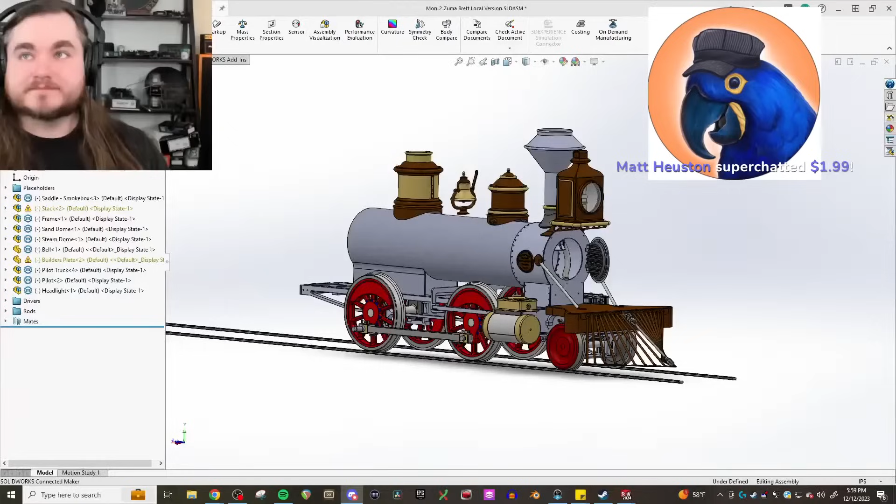Also Mark, you should know that people are asking about SolidWorks in chat. I had SolidWorks and Corey Gibson in my Railroader stream chat yesterday. I am glad, I'm glad.

Anyway, you can see here is our little Zuma lad. And it's missing a bit that it used to have, which was the phoned-in part of the cab. Last time, if you want, we could put it there, but I don't. You have the profile of the roof, and that's all you need. Like, that's the only thing that's really important, because that was actually done.

Oh good, oh good, look who's here now everybody, SolidWorks. Hey, I'm sorry I couldn't get around to working for you. I was dealing with more important things, like helping people who matter. I don't know, your whole website was down, you piece of shit. Fuck you.

Thank you SolidWorks. I don't think that's actually SolidWorks. I don't think it's actually SolidWorks either. SolidWorks, do you talk to your mother with that mouth?

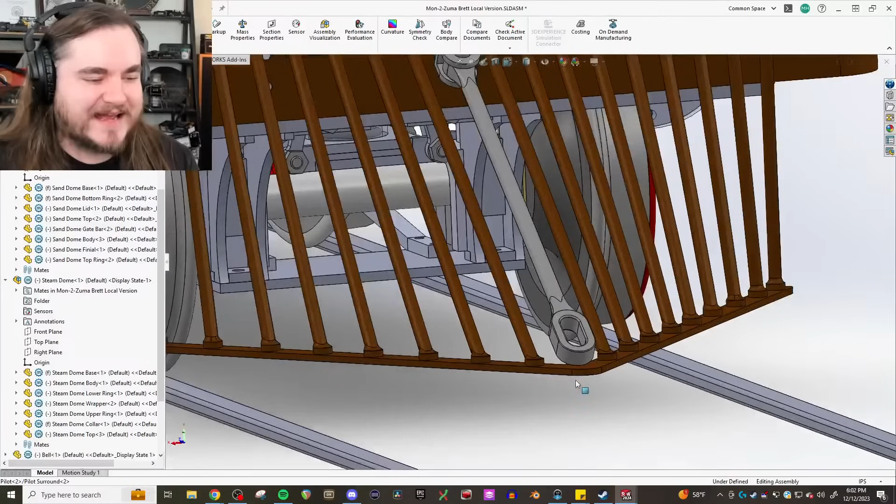The thing that happens when you aren't asking anymore, you're telling it - yes, pretty much, the blue tip wrench, the gas hatchet, the thing with many names. We now have a pilot, whatever it is - a link? Do you call it a link still? It's not a coupler, check what I called the part. Oh god, I mean that's a drawbar, but the upper bit - I thought that's what you were talking about. Oh, the upper bit? I don't know what you call that. Pilot draw head, pilot drawbar thingy. There you go, yeah, there you go - the pilot drawbar thingy.

Yes, very good - so those are all added in now.

Corey Gibson asks: which bathroom appliance would be the worst life preserver? The sink. Limes. Correct, you're not wrong, but limes - you're not wrong, but you are bad.

Okay, let's see - so we talked about Ding Dong, we talked that the pilot truck is now not just a floating axle and wheel set. It's actually a properly designed, according to the Baldwin spec, for a Bissell post.

Yes, lead truck - so I cheated a little on that. The pilot truck is Shawano's basically, which for those that don't know is Rio Grande number 3. Which one was Shawano? It was a 2-6-0 built a couple weeks after Montezuma. Tabawachi was number 2 - I'm sure Mainline's in chat. Mainline, tell us what number Shawano is. I think Shawano was 3. Yes, of course Mainline's there and says it's 3. Yes, good - okay, so the pilot truck is Shawano's, excepting the Bissell post.

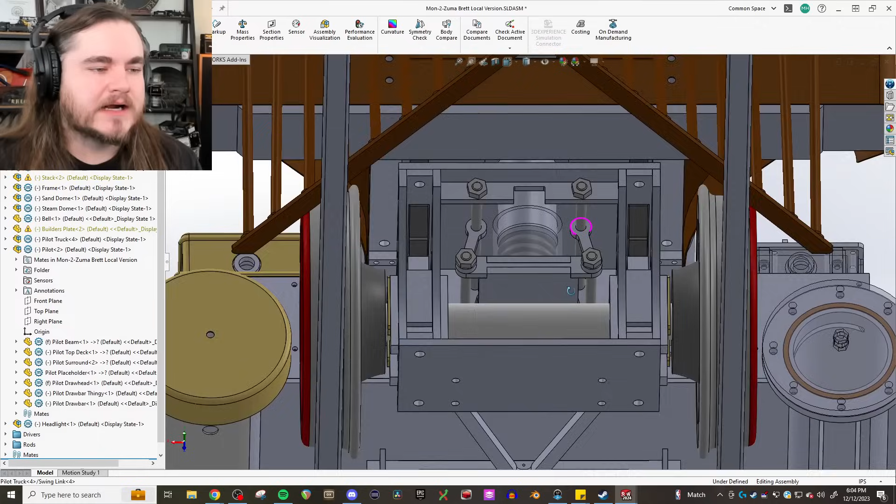On Shawano, it goes up through the pilot deck. I managed to design my own Bissell post that I think will serve functionally, but also have enough travel, and it does not protrude through the pilot deck. How do we oil it? Through a hole in the top. Gotcha, there will be a hole in the pilot deck - there will be a hole in the top, and that's one of those that it's like, oh, we need to oil this, grab a drill, zzz, there, we can oil it now. Yes, precisely - or an elaborate series of hoses, a la Dr. Broadtop, your preference.

Yeah, but we got the swing links, which actually I haven't seen this style on a one-axle lead truck before. This is kind of more akin to a 4-wheeled lead truck, almost, with the way the swing links are. That's pretty cool though - yeah, it's kind of strange.

It should center itself, like, let's set up nice. It's a little strange because in order for the Bissell post to work in conjunction with the swing links, it swings, and then the swing links also slide back and forth, so that it can actually move on an arc and not just laterally. Oh, that's bizarre. Yeah, it's one of those things that I don't know that Baldwin actually designed for that, or if they just kind of put it together and the tolerances made it work. Because really, the amount of swing that this truck is going to see is very, very minimal.

Right, but yeah, if you want, go ahead and rip open the thing in the Montezuma chat - I've got a reference for Shawano's drawings. Oh sure, yeah, show those on stream - that'd be kind of cool.

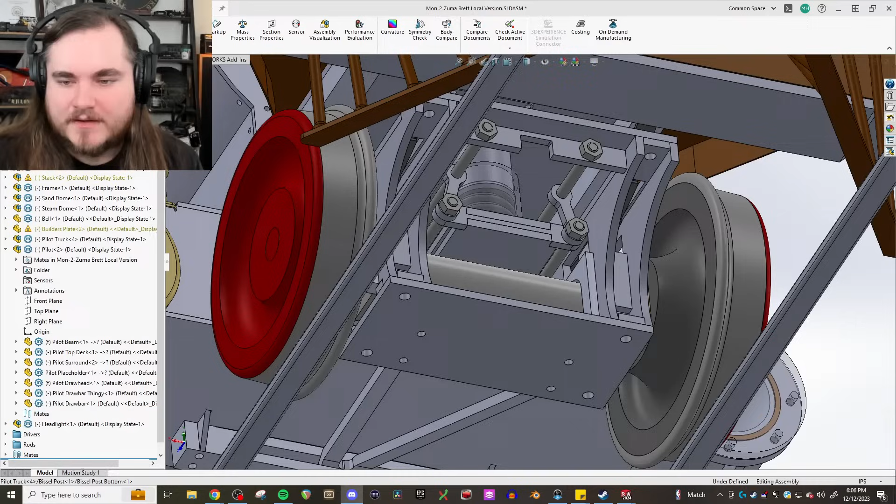Thanks to Daniel Gallery, the man, the myth, the legend. Daniel posted this reference, and I was searching through it, and it's like, oh wow, that's a really good reference. Holy crap, it's Shawano!

Wait a minute, it's something from the 1870s. Wait a second, that says Denver and Rio Grande. 1022, you know that? What page is it on? For me, it was page 2, row 2, items 1 and 2. But I think your rows are a little different.

Denver and Rio Grande, 1871, May 18th. That's probably about right. They're right next to each other. That's the erecting card, and the other one's the elevation card, I think. I can never remember which is which. It's a 1026D, so maybe it's this one.

We'll look at the picture next to it in the list. DNRG cylinders, 11 by 16. Oh man, really doing the thing. Oh, but yeah, there you go. There's your elevation with the double pilot.

Big Baldwin, big cows. It's two pilots in one. I assume that's for different designs, but I would assume so too, considering that the heights of the draw heads are different as well.

Yeah, but there's the pilot truck. That's cool that this exists.

This is going to be a great resource, not just for that, but also for looking at things like the dimensions and the flares on a lot of the cosmetic pieces. It helped with the domes. I actually revised the domes from when we last saw them, I think, to be Baldwin compliant. And the cab, it shows the cab in detail.

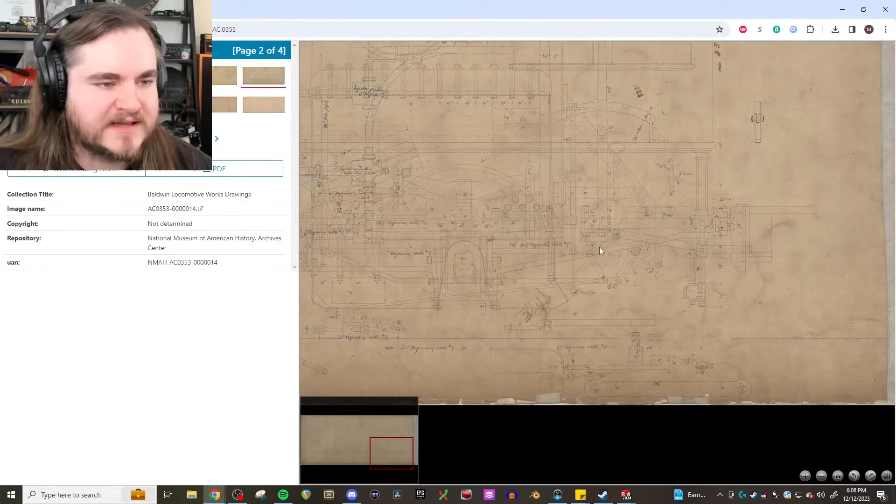That's something that we have zero pictures of, yeah. So there's a lot of stuff in here that'll be helpful. Lots of little fiddly shit too, like ash pan linkage and presumably grate shakers.

It's got a damper. You can see the damper in the builder's photos of Zuma, but now we actually have a drawing of like, oh, that's how it works. There it is, look. Oh yeah, the lever, and then yeah.

It does. It's for the front of the ash pan, and considering our engine will probably burn oil most of the time, a damper will be useful. Probably on the back though. It has both, it has a front and a back.

Yeah, there's this long articulated linkage to this guy for the front damper right there. And then the rear damper is this other pull handle right there. That's just a fun thing, like the development of American motive power there. It's like we didn't continue with that.

Oh god, of course she has crown bars. Duh. Yep. I don't know what we want to do about that. If we want to do, I mean, we have to do crown bars, don't we? Do we? Because we have to get in the steam dome.

Oh shit, you can't do radial bolts if the steam dome - you can't bolt through the steam dome. That is true. That's a mild problem. No, it's not a problem. I mean, a lot of engines have crown bars. It's just something that neither of us have worked with before.

We have dimensions for a throttle valve, presumably. That's hilarious, for some very large pistons, but I mean, I'm sure you could play football with that throttle valve. I mean, look how cute and tiny it is. 11 by 16s, they're only 2 inches bigger in diameter than the little passenger dude.

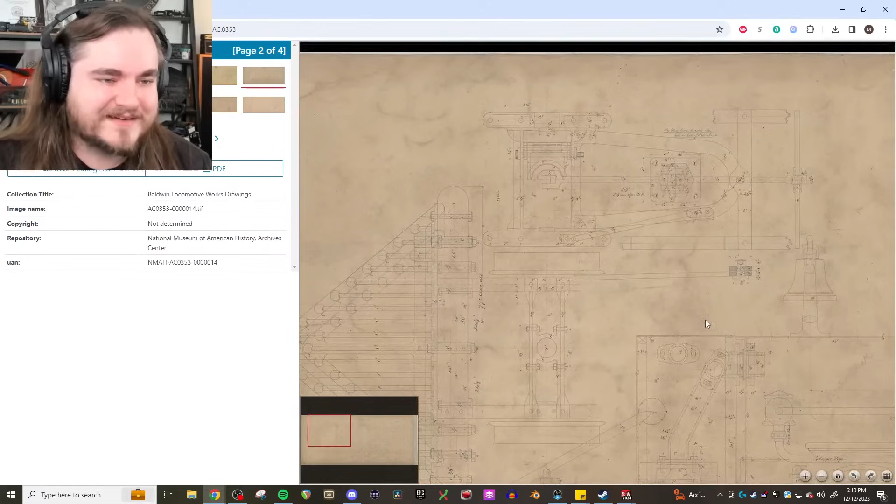How does one man have so many resources for these things? Somewhere Daniel's cackling. The Smithsonian's resource. Well, it's the Smithsonian's resource, Daniel just knew where to find it. How does Daniel know all these things? I know. Anyway, it's incredible.

Oh god, it did have the single branch pipe malarkey. Yeah, the straight - yeah, we're not that, we're like not doing that. Fuck that. Do we know how big - I guess there's presumably a dimension on that if you download the PDF.

Have you sized your branch pipes relative to this? Obviously these are going to be bigger, but no, we found this resource after I designed the saddle and everything. I'd be interested to do a back check on it.

Does only half of it have flues? No, they only drew them on half through to the center line and then mirror the pattern. It's almost like how the Zuma is drawn in SolidWorks right now - you do full build on one side and half disassembled on the other to show things that are behind other things. Efficiency.

That's super cool. What a good, brilliant resource. Freaking resource, no kidding. Yup.

Oh, but Brett, it shows the non-peaked version too. Or the non-hoopty. See, you've got the hoopty, but then it shows the peaked version? There's the peak underlaid underneath it. Perfect. I was just thinking for the rear windows and the door geometry it'd be the same, but yeah, it's got the correct roof on it. That's gonna be great.

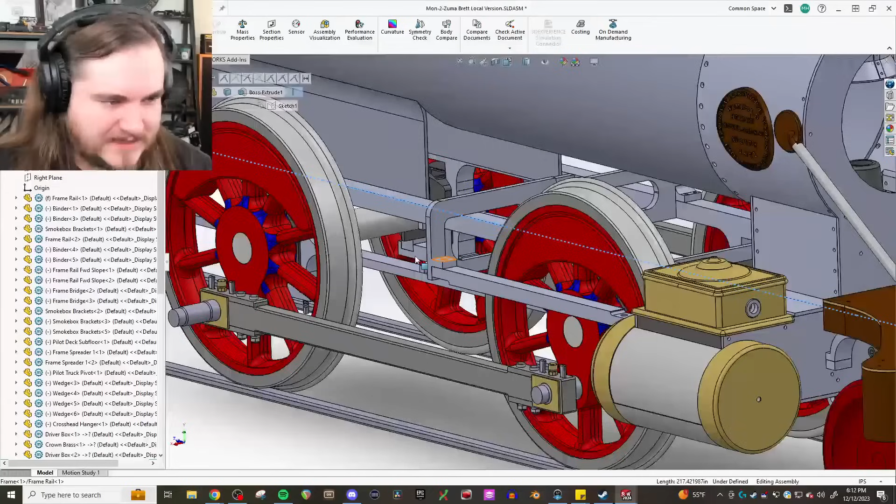And then Brett keeps talking about the frame actually being a thing, so let's pull open the frame just by itself. I just like staring at the frame, because my frame was very much phoned in.

Babies first, I'm gonna try and trace this drawing. And Brett came through and was like, 'This is how you make an engineering thing.' And then here it is. Where is the assembly? It should just be called frame.

There it is, yep. Because I was ridiculed for naming the headlight assembly.

Let's see, oh I missed a couple top chats here. Railman 1225: one would probably call the thingy the pivot. Probably, I don't know, probably. And Corey Gibson: why was the ghost so tired? He worked the graveyard shift.

I feel that. Yeah, so here's the actual frame of actual frameness, with your driver boxes. Yeah, look, I contributed parts to this - boxes, hub liners, crown brasses - but we have frame spreaders. We didn't have any frame spreaders before. We've got the semblance of what will presumably be - we're gonna put a spring buffer in this thing, right?

Please, I mean, we can in the tender. Yeah, in the tender, not in the engine, but yeah. In the tender I'd say let's put a spring buffer. Oh, you're gonna feel every hit, every single hit. We're gonna feel every hit, and it's gonna throw the engine off the track.

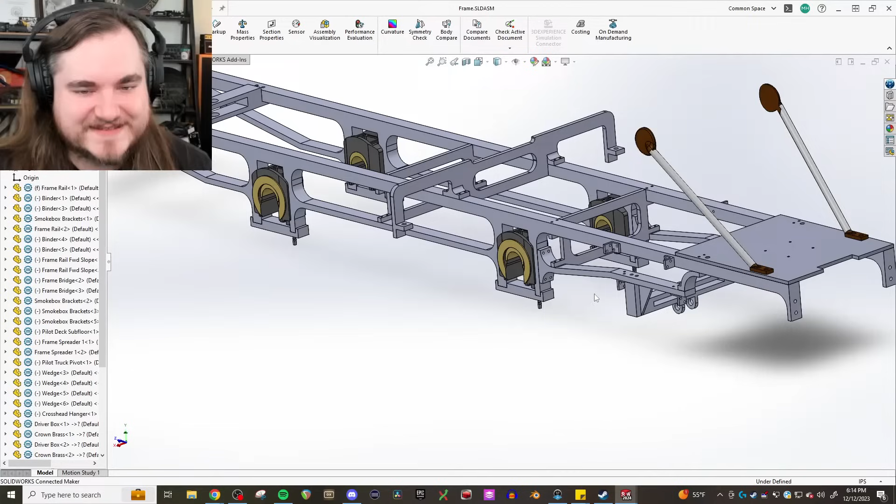Pretty much. Well, the tender was ahead of you, but yeah. So anyway - oh I see, you'd have to set something on the independent, and I don't think it had a driver brake cut out. But yeah, we actually have swept things for strength. We have actual spreaders going across with locations.

What's that hole for? Is that for the drawbar pin? That big hole back there? Yes, the big one's for a drawbar pin. Oh, that drawbar is gonna stick in there pretty far, isn't it? Huh, yeah, interesting. That's kind of a placeholder - we can do with it as we will.

Okay, cool, we have binders. Oh, he threaded the lollipops. Oh, you love to see that. I threaded the lollipops, but they're the same piece as the wedge, so I cheated a little bit on that. You put them on the wrong side?

Are they supposed to be wedges that go on the trailing side? They have been on every single engine I've seen. I suppose you could probably do it that way, but then you're adjusting away from your piston - well, your crosshead, right? As everything wears, you're trying to pull it away rather than come closer.

So you did - I will dock 10 points. Yeah, that's fair, that's fair. You put the lollipops on the wrong side, but that's fine. Oh no, how dare you? We're gonna construct it tomorrow, so. Oh yes.

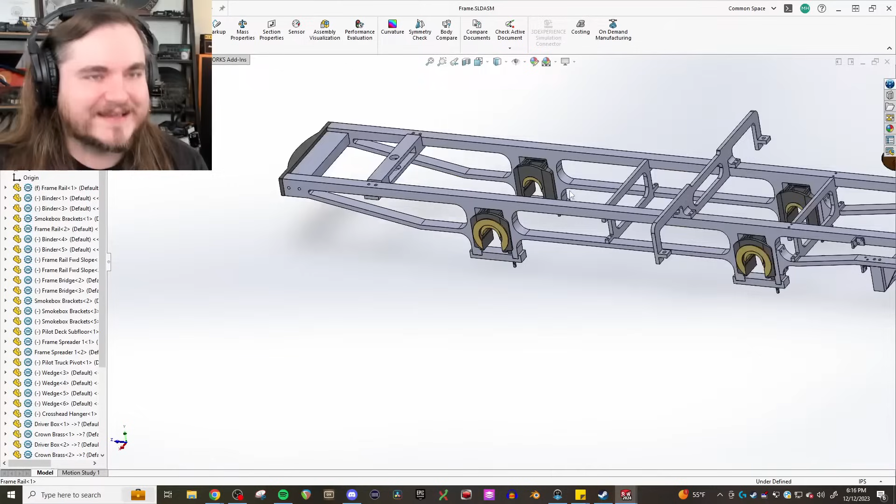Please, can we begin? I wish. Can't wait. All right, I'll call him up. Yeah, call your friend. Mr. Moreland knows people that know things, and there have been discussions about things involving official matters, and that's about as much as we can say right now. But anyway, talks have begun. Unfortunately, fortunately, it's fine. More talks will need to happen.

Anyway, we also have the actual final refined interaction with the saddle itself, which is exciting. And then, of course, the connection to the lead truck. I love these big, curvy, beefy boys up here. Those are cool. I hope they're beefy enough.

So what's the final thickness of the frame? It should be 3 inch, measured laterally across the rails. For the top bits it's some weird dimension, and the bottom I think is 1.5 tall. I meant thickness, 'cause that's what matters when you laser the plate. Yeah, we've been at 3 inch for a minute. That didn't change.

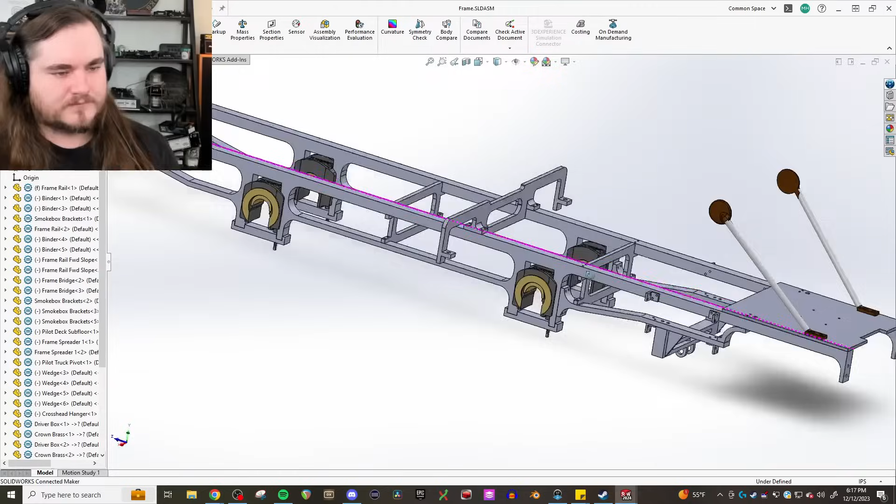How thick are the crossmembers going to be? That's a big plate. I wonder how big the bed is. Crossmembers I think are an inch thick. They look like an inch, yeah. If I had to guess - we've got a measurement tool, and it's telling me distance, 1 inch, yep.

I tried to do everything on the frame out of reasonably available plate. Same with the pilot truck, which is actually kind of cool because it's all slot and tab 3/4 plate. So we could get all the pieces burned out of a 3/4 inch sheet of steel and weld the thing together in an afternoon. That's the whole point of the death ray - you can burn it out and it's a super clean cut. You don't have to machine it quite as much as if you had a plasma cutter or a water jet. It gets a cleaner cut than a water jet - it's pretty much perfect.

So I guess the only thing I was thinking about this last night, when I couldn't get to sleep after programming until 3 in the morning - you'd think I'd fall asleep, but anyway.

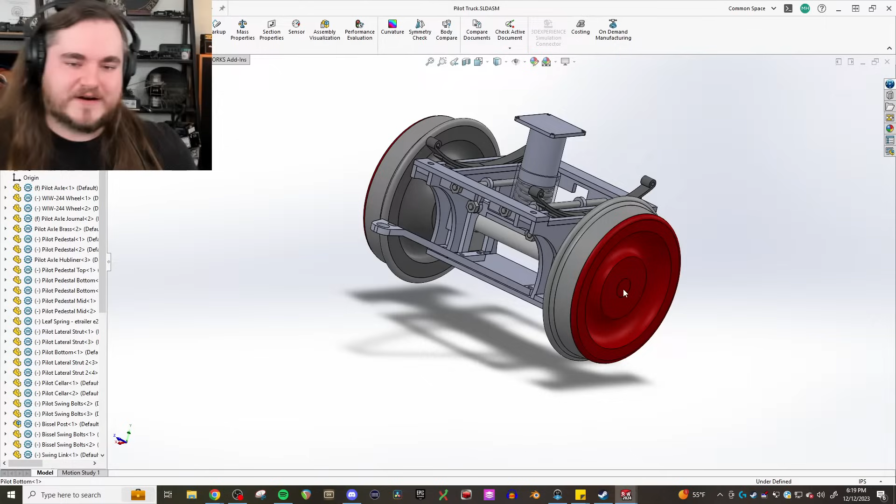If we're gonna do weldment stuff, we're gonna have to be very careful about how we fixture and either normalize or balance the heat so we don't warp a bunch of the complicated shapes. I was thinking in regards to the saddle, because a lot of it is going to be interior fillet welds, and it's going to want to bend all those plates and warp it. So we're going to have to fixture the crap out of the thing and then normalize it, or find a more clever way to weld it so you can weld it on both sides evenly.

I think the only structural welds in the saddle are the cylinders to the saddle castings, and that is probably the most critical dimension on that whole assembly. Everything else has mechanical fixturing - there are a couple of braces and things that are welded, but I think you can put the whole thing together with bolts and rivets. I was imagining we were just going to weld the whole shape up. I don't believe so - if you want to look at it real quick, it should be pretty obvious.

Let's go take a look-see.

Bolts means it's easier to replace worn parts. How often are you replacing the smoke box? I don't know - if you're gonna run it up Cumbres, probably a lot. Well, one got a new smoke box after 60 years in service. I think the goal is going to be to make the smoke box somebody else's problem - I hope to be long dead by the time the smoke box needs to be replaced.

Yeah, I would agree. Okay, I'm seeing... that's kind of the weird thing about this project - there's some stuff that's welded, but I think mostly it's bolted and riveted.

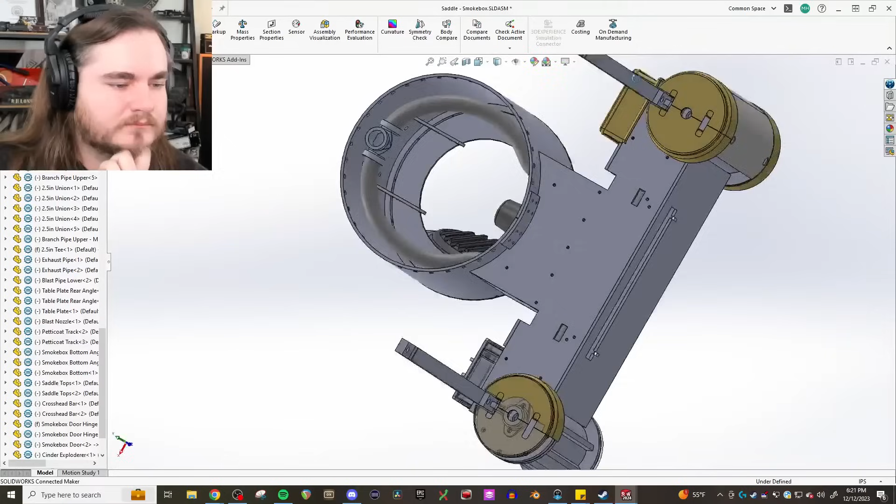Well, when you think about it, if we get this together, it will outlast us. It will be around a lot longer than all of us will be. Hopefully. So we can hope - if we do it right.

So what are the other frame interfaces you're thinking of? I know the bars run through here and then the lower bar runs through there. I guess I can look at the frame and see where the little brackets are.

Okay, so we're bracketing basically four per side, points. We'll probably, once it's bracketed, go with a welder. Probably not a bad idea. Okay, yeah, that's probably fine.

Might want to do a quick back of the napkin on how much force this thing puts out. It's probably not much. I think each cylinder can generate 10,000 pounds roughly.

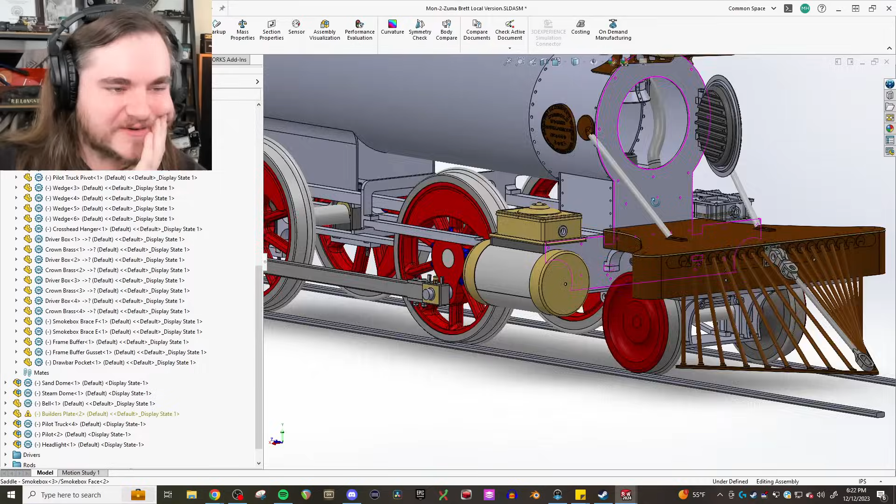It's so cute, it is so cute. I believe that came up last week with Jason. Tiny, so it's less than 10,000 - I want to say it's like 9,700 pounds is the maximum force. Stupid little pistons, stupid cute little choo-choo. He's so little, is that a little choo-choo? Yeah, well you'll love to see it.

Let me catch up on these top chats, and then I guess we'll figure out what's next. I know we were discussing crosshead shoe, most likely. So, shoe and thing and stuff and words.

All right, let's see. Corey Gibson, my man - why do pancakes always win at baseball? They have the best batter.

Yep, who makes all these? Dark Knight 96 - how many Zumas can a Zuma while zooming zestfully? I don't know, many zooms. It's almost been 2 years. Time doesn't exist, so many shenanigans. Year and a half, not 2 years. After a year and a half, then we can get to 2 years.

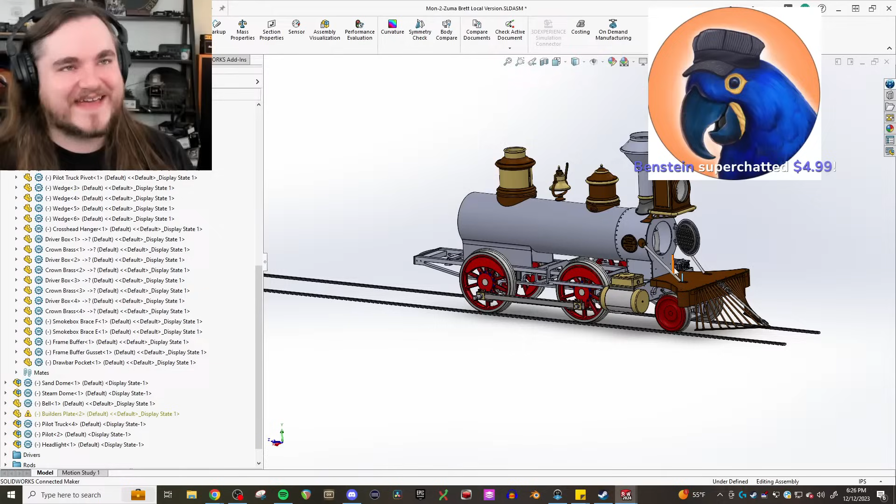We have jokingly thought about insetting magnets in the cab wall where the nameplate goes, so that we can just magnet other nameplates over the top. We have joked about that, I don't know how serious we'll be. I want a plate that says Smitty on it - he was number one. Yes, Smitty was the first locomotive on the ES&D. So anyway.

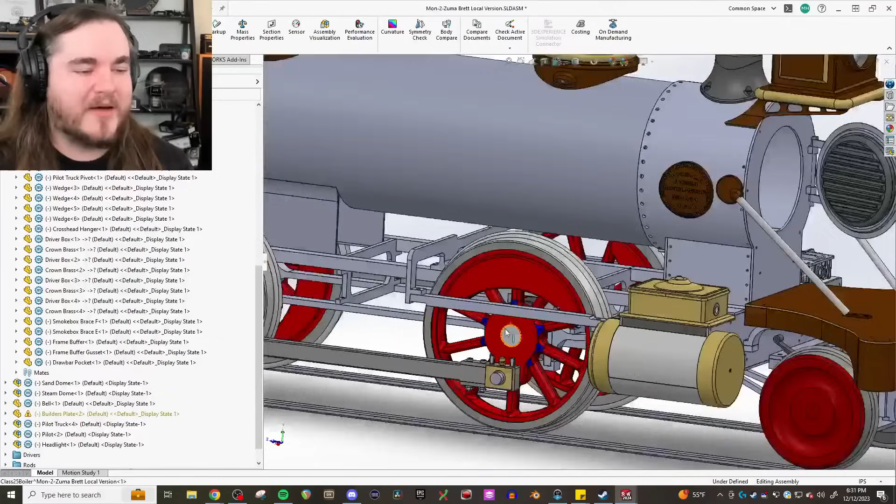Blues Crew asks about magnet paint. What do you mean magnet paint? We will be painting things. But Brett did add the little blue triangles, not where they'll actually be, but where it was convenient to add them in SolidWorks, because she has those little blue triangles on her drivers. But we don't have the red and blue stripes on the domes, because trying to segregate that into areas you could paint in SolidWorks, I will say I really tried, on separate occasions, and it just would not work. That sounds like hell on earth trying to do that. Wrapping around that curvature, SolidWorks just wouldn't do it.

Taladay 56 asks, you're a machinist, what's the best 3D model software so far? What do you mean by best 3D model? I think they mean best 3D modeling software. Oh, 3D modeling, SolidWorks, of course. Next question.

SolidWorks is the one that I learned. I don't know the other ones, so that one.

Blue Screw - damn it, autocorrect. Magnetic paint, I don't know how that works. The funny thing about magnetic paint is you don't need it when the thing you're painting is made of iron.

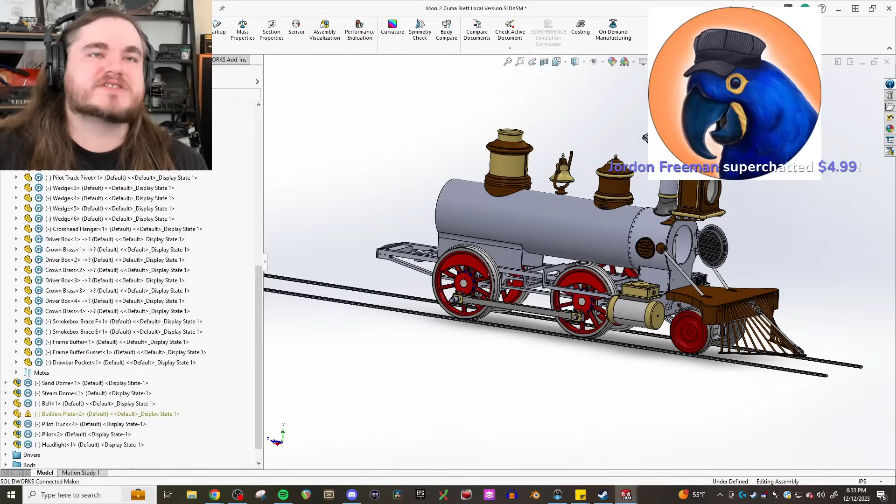Darknut96 asks, will the Zuma slash DRG Class 25 appear in Century of Steam? We do not answer Century of Steam questions here. I appreciate the tip, is that 2 pounds or 2 euros? I can never remember the symbol. I appreciate your contribution, but we don't answer COS questions here.

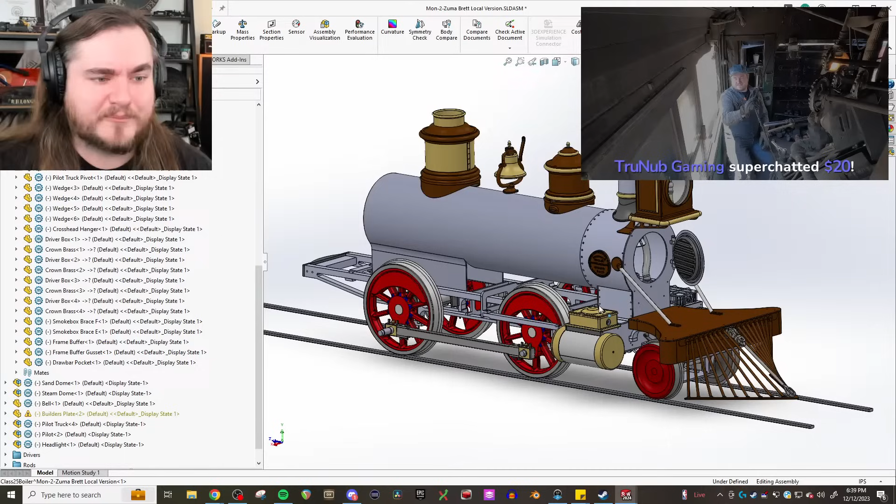Blondie Hacks is doing a build, is it 3 1/4 or 3 3/4 inch gauge? I don't know what gauge it is, but she's building a cute little Pennsylvania 0-4-0, and that's been an amazing build to watch her craftsmanship. She called me out in one of her series' comments, favorite lately. So good. She's focusing on the machining and forming and fabrication sides of things, and I would be more likely to talk about the design, locomotive history, and engineering principles on my end, because I'm nowhere near as good of a machinist or fabricator as Blondie Hacks is.

But I know a little bit more about locomotives, I'd imagine. So that was always a dream. And then we sat there staring at this cute little doot, the Denver and Rio Grande #1 Montezuma. It's a class 25 locomotive. It's not a Montezuma—someone commented that on my YouTube yesterday, and I face-desked about as hard as physically possible. It is the Montezuma; there was only one. It was #1. There were 4 locomotives of the class that worked on the railroad, and apparently, based on pictures we found elsewhere, there were a couple other Baldwin 8.5 C3s, which was the Baldwin classification for these, that worked on other railroads that were 3-foot gauge.

Super neat. But we looked at it, and it's no more complex than that little 7.5-inch gauge engine. It's not really that big, it hardly weighs anything. In fact, in many ways it's less complex than an engine you could build in 7.5-inch gauge, because it has fewer drivers, simpler things. It's bare bones, it's early. If you did the Zumi boy in 7.5-inch gauge, it would be smaller and simpler, easier in terms of weight and whatever. But if you did something with Walschaerts valve gear or multiple drivers, it'd be a lot more complex.

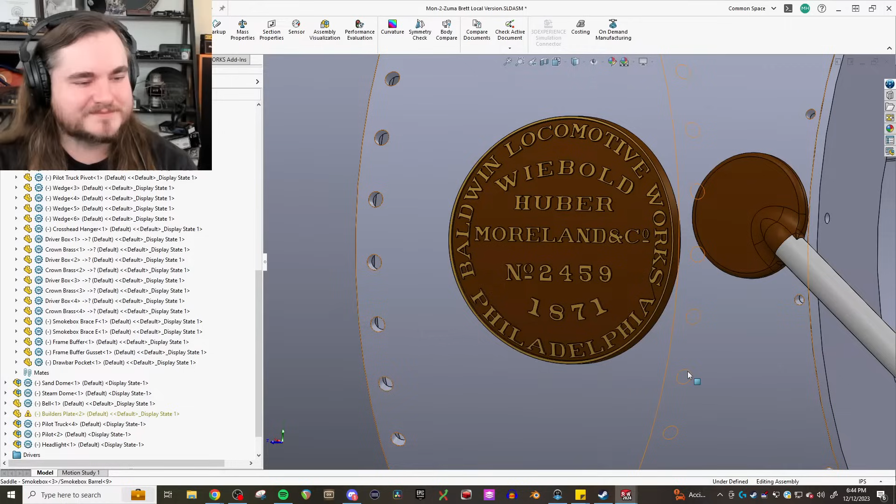I think you should do 1870. Well, do 1871 on one side and then have another. We're gonna have a replica of her actual plate, which Caleb sent to me, so I actually have the model for it in my email. We're gonna put the replica plate of her plate on one side, but then we're gonna put our plate on the other side, ES&D 2020X.

That would be silly. So you're gonna have the modern run everyday plate and the photo charter plate. Got it, pretty much. Yeah, I imagine we'll get 2 done up of each so that we can swap them out, because I'm sure the purists will want both the original plates on it.

But we're going to run this engine at least once as if it was timed, with that whistle. We're going to run it with that whistle on it at least once.

Good lord, that was funny. Did he pull up the scary whistle? The Huber 6 clip, somebody in chat pulled up the clip of me blowing the Huber 6.

So we're gonna run it with that at least once. If I was not, actually— record, watch, it'll drop 10 pounds.

Well, I was talking with some of the channel members a couple weeks back, and we actually know what the Huber 6 will vaguely sound like on that pressure, because that clip is on 145 psi.

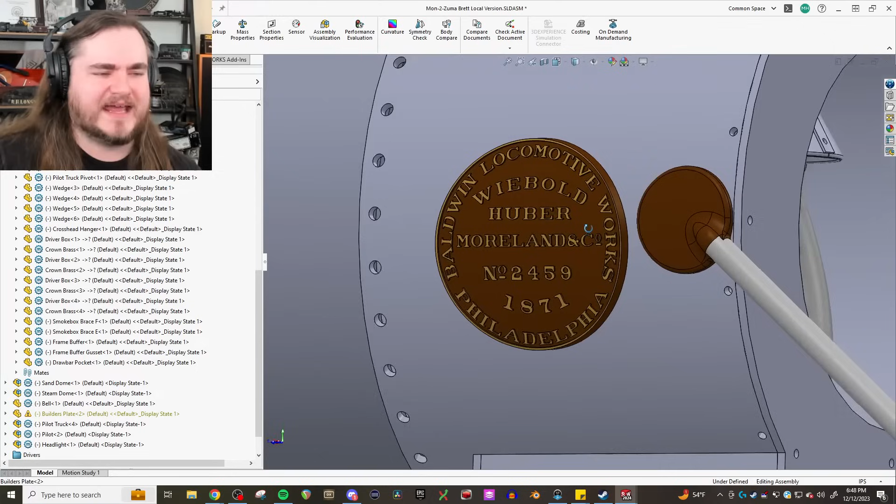Call sign Apollo asks about nameplates, carriage bolts with inside nuts. I'm not sure, I think they've got big slot head screws on the 346 from what I recall. They're supposed to be riveted technically, but we could probably screw them in, yeah.

Corey Gibson, no, this is a Mon-2-Zuma. This one is the second one. You know, I hate that he has somewhat of a point. You do somewhat have a point. It's not the MonTueZuma because it's not the original, but it will be the one that exists. Only MonTueZuma, so it is the MonTueZuma technically. It will be the number one and the only MonTueZuma. So it will technically be the one, the only, the MonTueZuma.

If only you could source one little piece of steel that came from the original. That'd be hilarious. We need to go invade the Salida Hospital and find her original boiler. That'll be difficult for a number of reasons. Didn't the hospital burn down in the 1900s or something? I was gonna say the hospital burned 100 years ago. Still, okay, it doesn't need to burn, we need to go find it anyway.

Quick, okay, you know what we'll do? We'll get a Gillette razor blade and weld it into the frame, and say it was scrap recycled from MonTueZuma. I mean, there's a pretty good chance it was. Pretty bad actually, because she was probably almost entirely iron. So, steel. Yeah, one atom, that's fine - that's all we're going for. Details.

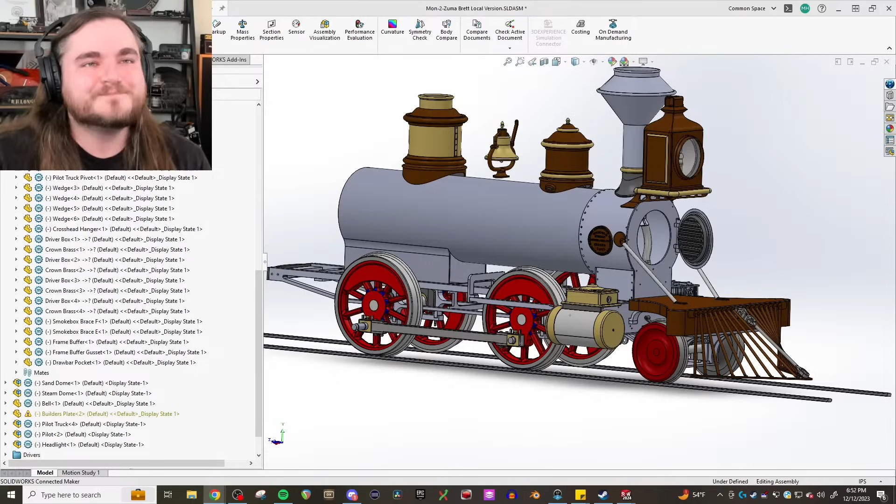There you go, anyway, so she should be relatively easy to transport around. I'm eventually going to get to the bottom of these.

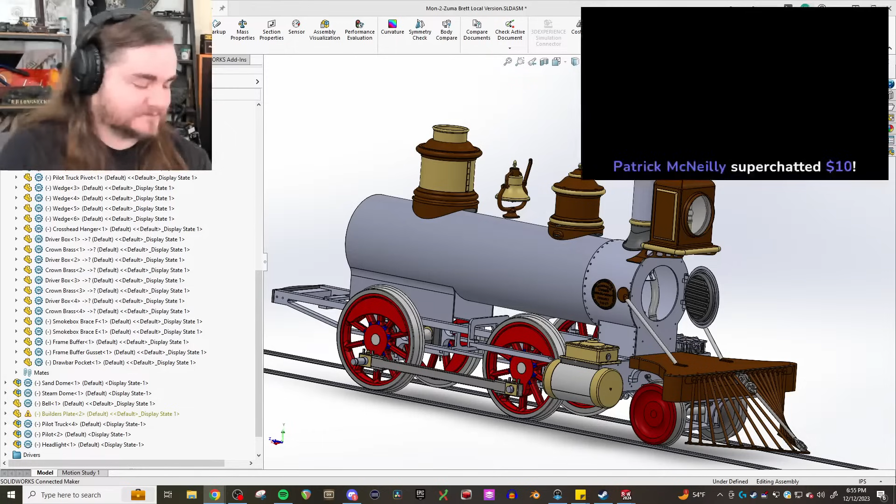Patrick McNeilly asks, just curious to know the general location where the hospital was - also, eBay has some great slides of the D&RGW locomotives. Spend your money as you wish. Jeff buys slides on eBay all the time for the museum and is always showing me those, those are cool. I don't know where the hospital is - Brett might, it was in Salida. Well, it doesn't exist anymore, hasn't existed for a while, south of the Monte Cristo Hotel, which also doesn't exist anymore. I've actually been looking into it - I didn't realize it was a Rio Grande hospital. What? So that's kind of neat. That is kind of neat. I think it's vaguely near where the current hospital is. Interesting - somewhere in Salida, there you go.

Andrew Frame thinks we should give Anthimeter the chance to defend the S1. Are people talking poorly about it? You gave a very brief explanation. I did give a very brief explanation of how much you liked it. Let me get to the bottom of these top chats - I have 2 more, then we'll have Auntie explain why the S1 is the best choo-choo. Andrew Frame: going through life with my name listed on forums as 'A Frame' - you've heard them all. Oh, I didn't even realize that. You are an A-frame, do you store much wood in you? Anyways, I didn't even realize the joke that was coupled with that - I literally thought of the A-frame shed my granddad built at my grandma's place where they stored wood. I wasn't even thinking of the connotation of the joke.

Transit Biker asks, more likely to an ironclad's armor versus razors? Yeah, probably.

Railroader Davis says the plan for the 15-inch gauge stuff is a small mogul or 10-wheeler, and it would have an industry for it to work as we're setting up a sawmill in the woods. That would be dope, that'd be fun, that would be super fun - actually working a little industry on your farm with a real train, even small.

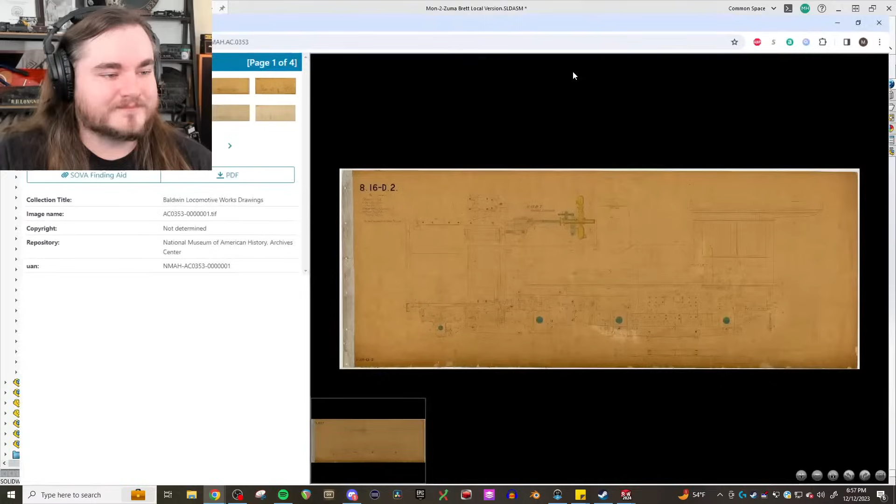Something about a real speed record holder, something about a 150 mile an hour ticket, something dark side - it did 31 miles in 12 minutes, and either it went 150 or it went through a wormhole.

Yeah, I know where my money went - obviously through a wormhole. Clearly the dynamometer didn't go through the wormhole with it. All I'm gonna say is it's duck season.

They're rebuilding the wrong locomotive, T1 Trust. Someone tell them to make an S1 next. As much as I'd love to see a new main build line, the S1 wouldn't be able to fit anywhere. That's true, the thing's 140 feet long. That's a big, stupid choo-choo.

The old Crestline Roundhouse was for sale a while back, and it still had the turntable pit. Huh, yes, the pit. The turntable was cut up though. Well, rebuild the turntable and run it in the Roundhouse. Running in the pit.

Okay, well let's see about doing perhaps a crosshead setup here. So Heist, do you have a moment for a potentially thought-provoking question?

Oh yes, sorry, I said I'd get to the end of top chats and then talk to you, and then ADHD said go ahead. It's fine, it happens, plus there's a bazillion chats. Which is awesome, support Heist, he's good like that. Yes, thank you.

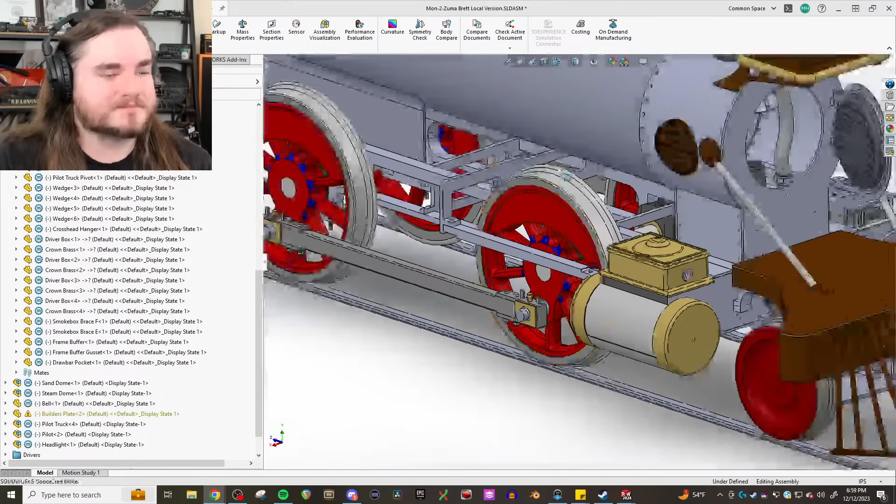My thought or question was going to be: how much stronger, based on just material difference alone, would a modern Zuma's frame be compared to the old Zuma?

Oh God, I mean it was probably originally wrought iron or something, wouldn't it have been? Probably cast iron - I don't think it would have been cast in one piece in 1871 though. I'd bet on it being wrought iron, not cast. Well, it's lots of small spindly pieces, which would make me think wrought iron. This frame is, I think, 2 pieces, or 3 if you count both sides, whereas the original one just had the top rail, and then each of the lower rails were separately bolted to the frame jaws. True. Yeah, I'd bet on it being wrought iron.

And so if you think of the yield strength of iron versus even something like A36 steel, even the garbagest of garbage steels, even Chinesium - yeah, I mean goodness. HRPO - that's what, speaking of frames, HRPO.

Speaking of frames and casting, and this ties back into the S1 - it is the largest single-piece casting made for a railroad ever. Isn't it something like 90 feet long? 92 and a few inches. Christ on a bike. With the main reservoir cast into it, and equalizing reservoir too, am I right?

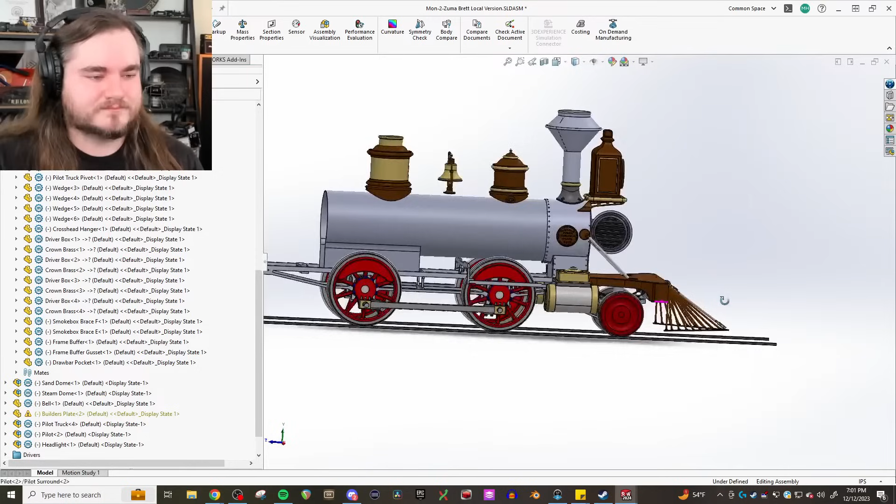Say that again, I only caught about a third of that. The main reservoir and the equalizing reservoir cast into the frame. I know the T1 had that. Yes, well, sort of, sort of. It was technically cast into the frame, but there was another lining, a separate piece, that was put into them. And it's still cast into the frame. That's insane. Yes.

So is this an 'it depends' drink moment? It always is, that's the secret. Drink? Okay got it. Yeah, all I heard was Carl, drink. Not you.

Brett, tell me that you can have the assembly on one monitor and the new part on a different monitor, please tell me that's possible. Maybe? I don't know, I only run with one monitor. Oh child, get good.

He has 4. Yeah, literally. It just - it does not. It looks like it's going to another monitor, but it has to be within SolidWorks. Span displays. There we go. There we are. Oh goodness, and the display - wow.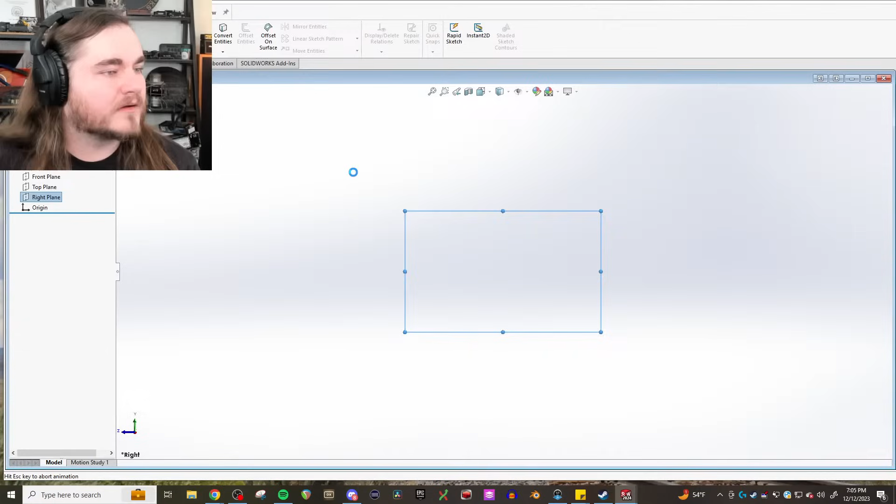So let me put this the way that we have our assembly, and I'm looking at the right - I want to sketch on the right plane. Okay, so I've got a reference up on another screen, and I'm gonna basically sketch the shape and then get some dimensions figured out.

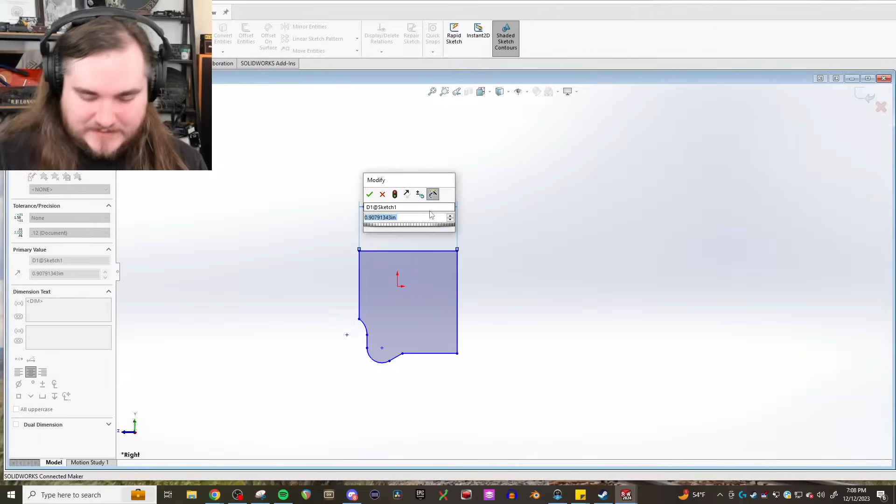And then somebody will say something smart about half-sleeve roller bearings - we're not doing half-sleeve roller bearings, we're just going to make plain bearings like men, and everyone just needs to realize that we die like men. Yeah, so I like that. We're just doing plain bearings because they're really not that incredibly complicated.

They're not incredibly complicated, and there's not really anything wrong with them either. No, they worked for more than 100 years. Guess what, the Great Stromboli did nothing to the 491s, and they presumably have not been out from underneath the engine since 1957, and they've never had a problem. Knocks on wood.

Zerg Smasher Gaming donating $5, thank you friend. Question: when you build Zuma Boy, will you use modern materials or try to build it out of the exact same stuff it was originally made out of? As we were just discussing, modern materials - we're not making crap out of iron, we're not going to have an iron boiler, we're not going to have a lap seam boiler, we're not going to have all of the sketchiness. Where applicable we will use original materials like bronze, but we're not going to make the thing out of titanium and aluminum. Basically everything that was iron will become steel.

Just make it all out of Inconel. It'll be perfect, it'll be fine. Yeah, there you go. We'll just make it out of Delrin instead, it's easier to machine.

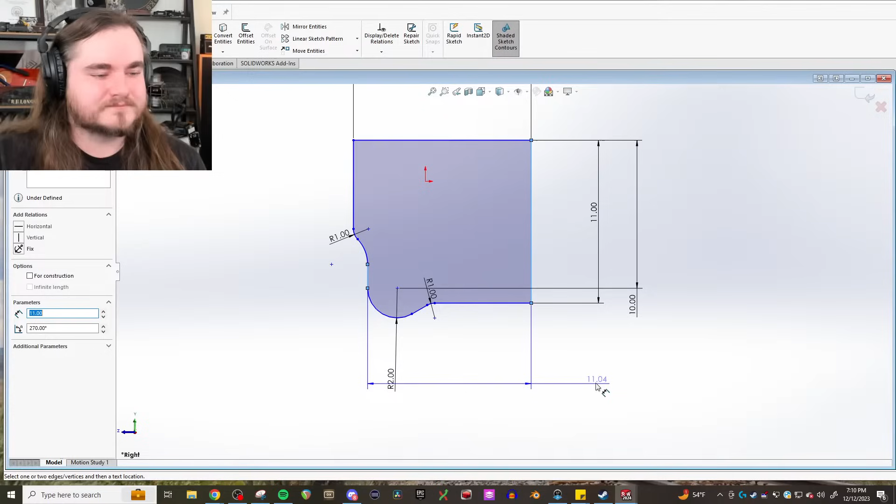Damn it, Corey, you son of a bitch. A random CN unit member for 4 months says, don't know if you know yet, but you can change the whistle. I'm not sure what he's referring to there, probably Railroader, and yes, oh yes.

Why was the leper hockey game canceled? It was because of a face-off in the corner. Oh Jesus Christ! You know what the leper said to the prostitute, right?

No, no, we need a demonetization button. I don't think we just pressed it. I don't monetize streams for this very purpose. And it's still happening because somehow the streams always get demonetized. Somebody will gift 50 memberships, and the German military march ends up eating the monetization of the stream anyways. So das copyright, das copyright, yeah, copyright.

Oh man, I'll obey the copyright. Almost there on the shape on that.

It's very nice, a goofy cute little crosshead. We're gonna have to cast the crosshead, then machine all sides of it because it's all shiny and nice. We'd have to cast the crosshead, the guide bar.

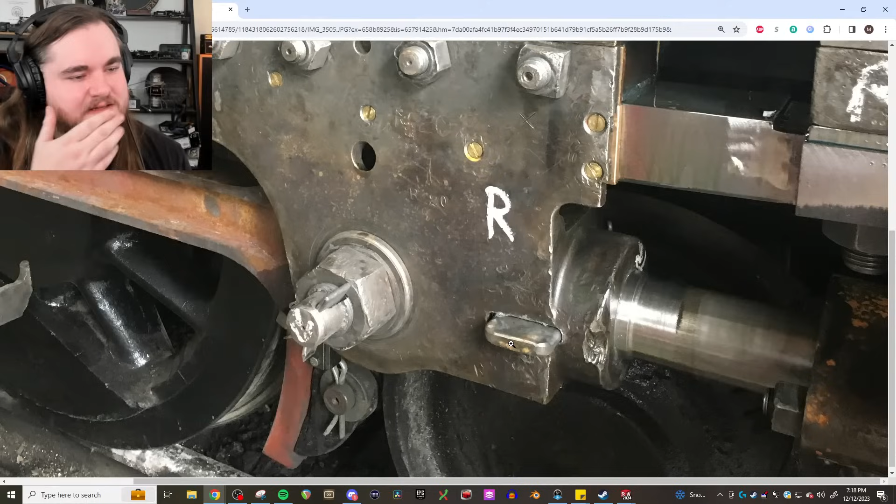I'm back. I see the picture that Brett sent me. Oh God, that is a big casting, isn't it? Das ist ein big casting. Yeah, I had this picture that basically showed the same, but yours shows the better detail.

I was looking at pictures and thinking, do I have a picture of 20 that has the crosshead? Oh, I have a picture of the crosshead. Cool.

So how does one... did you? I guess you were out of town for when we took those off and put them together. Yeah, I wasn't. I just machined the bolts, man.

So are you aware of how the shoe and everything interfaces with it? Is the shoe just on top, or does it go on top and down the sides? So look at the picture I sent. The shoe is kind of T-shaped, but the middle of the T is really fat. Oh I see. Okay, and then it bolts through the shoe to the side plates, air quotes, even though it's part of the casting, and then it has side shoes, and that's what the little bunch of brass slot-headed screws is. I see that.

Okay, and then, yeah, the wedge is a big honkin' slot through the casting. On Zuma's it's at an angle, but on 20 it's straight. It is a tapered slot too, which is fun. And then the piston rod has a little shoulder with the taper, and that's where it interfaces into the casting. I recall that being a point of discussion because reasons.

Anyway, because burgled, yes. Burgled. Taper point of discussion. It was...

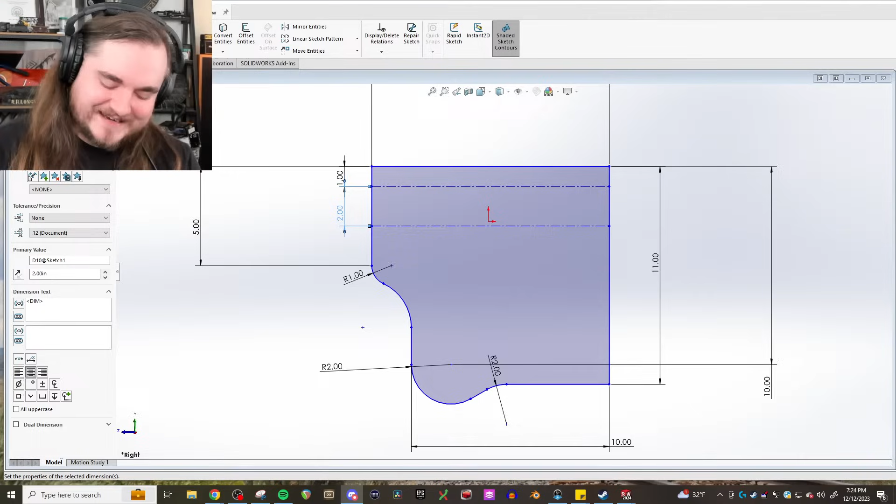Cortez, Ute, and Del Norte would like to know your location. Oh no, no, no, no. No? That's not how you say that. Wait, what? That's not how you say it, it's Del Norte. Why? Fuck off, they know, Colorado, no, there's no way. I know there's the .0 shit, but no. Tom, here this is Salida, this is the Salida thing. Buena Vista, Salida, no, Buena Vista, Del Norte, I'm being gaslit right now. Denver and Rio Grande. I won't stand for this. Buena Vista is a contentious one, I will admit. Buena Vista kind of depends. I have never heard anyone say Del Norte. It's Del Norte. Colorado did not like Hispanic people probably many, many moons ago, and this is how the things are now pronounced because of that. Is that even for you? I think it's real, like this is Spanish people. I just think it's that nobody cared.

Could also be that, but that's how they're pronounced on the railroad. Yep, this is an etymological crime. It is, hey man.

But welcome, hey man. Zerg Smasher Gaming, $5, thank you friend. What did the baby pharaoh say when he got lost in the dark tombs? He said, 'I want my mummy.'

Great, now I'm gonna be thinking of that Doctor Who episode. Oh god, why? No, bad. Why does the mummy have a British accent? Because I sure as hell was not going to try an Egyptian accent.

Mr. Shooter 4, $10, thank you friend. Hopped on just in time for a lime-worthy joke. Good thing I just bought a case of Corona. You enjoy those Coronas, my friend. There is certainly enough limeage going on with this stream tonight. 9 Coronas, good Lord, was looking Corey Gibson fine after 9 Coronas. Woo! So wait, 9 Coronas, I'm glad most of you knew what I was talking about.

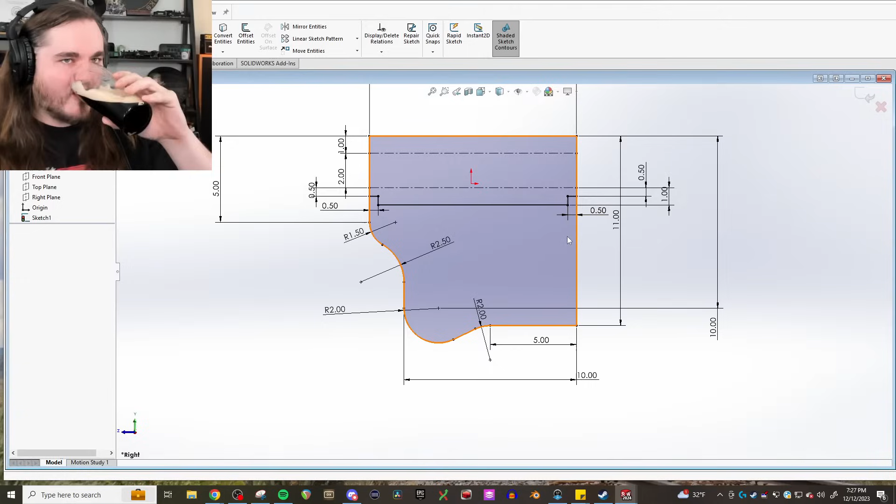Laughter is contagious, so if you are sick of my jokes, I'm sorry, there is a pundemic going around. There really is, god damn it. We've all caught it. And you're just going Corona nuts with it. Yep, going back to the language barrier.

How do we pronounce Saltillo? Saltillo, right? Not Saltillo, Taylor. Saul Tiller? It's Sal Saltillo, Taylor, but there is a Mexican way to pronounce it: Saltillo. Exactly, yeah, but it's Saltillo.

There's one of my coworkers at work, we're gonna start doing work in a new territory, and I'm not excited for it. But that's not the point, he just horribly butchered a Pennsylvania Dutch name earlier at work, and I thought it was hilarious. Ooh jeez, I mean I know what it was, it was Croxton, it's like no, I think that's Croydon. Croxton.

Corey, why are you spending so much money on limes? Corey took my need for a joke during that shitty Railroaders stream and has not stopped providing shitty jokes for the subsequent like 3 or 4 streams. I feel like I'm slacking. Yeah, that's why I started joining these again.

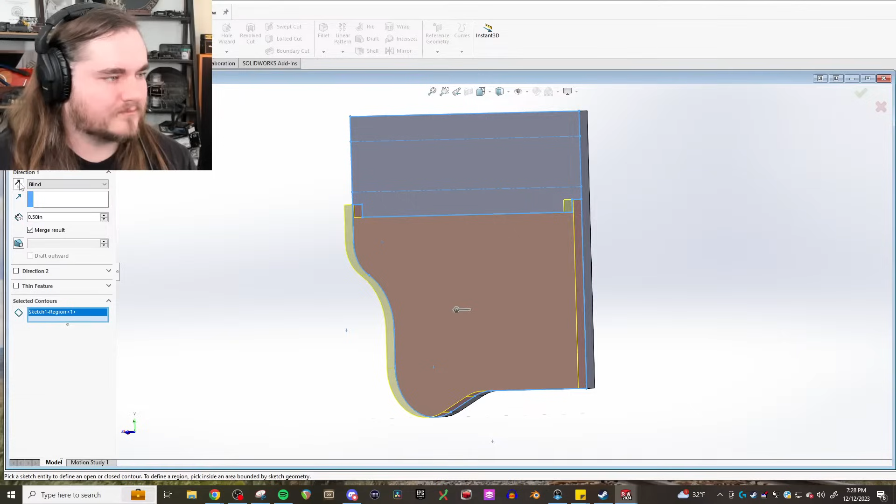Chat is nothing but limes. As it should be, all the limes. Corey Gibson, you were shocked when you found out your toaster wasn't waterproof.

Oh, ouch, don't do that folks at home. Okay, that's one thing where we have to have a warning here: do not do that, don't put your toaster in water. No, do not do that.

There was a Cards Against Humanity game I was playing, and there was something like 'your favorite bath toy' was my toaster, and everyone was trying to be like, don't put a toaster in the bathtub, don't put a fork in the outlet, don't eat the yellow snow. Exactly, I mean the yellow snow's tasty on some occasion.

Railroader Davis donating $4.99, thank you friend. The Wi-Fi on my farm was really bad, so I moved the modem to the barn, now I have a stable connection. God damn it, hey that's a good idea, yeah I mean that worked.

That definitely worked. And then right under that, Corey Gibson: the wedding was so beautiful, even the cake was in tears. Ooh, tiers.

No, Corey Gibson's afraid of speed bumps, but he's slowly getting over it. Oh my god, Corey's gonna break the economy just through stupid puns. Yes, puns. Corey, you're out of control, my friend.

I think I'm gonna have to vote myself now. I think distinction of best pun thus far, potentially of the stream, goes to Poker Face Productions for a twofer: they ate a clock the other day, and said it was very time-consuming. When they had to go to the bathroom, they said it was hard passing time. Oh, god damn it, yeah, that wins.

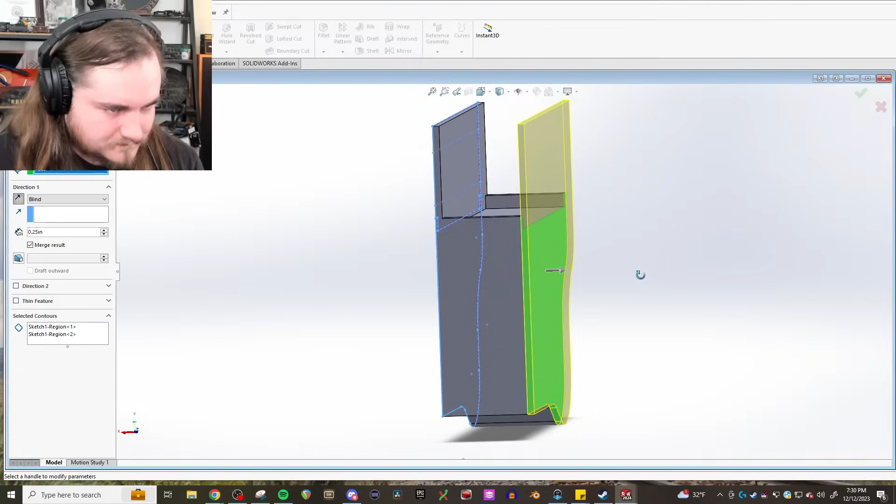Our families? It's called the world.

Christ. Captain, I wish to report a mutiny. Oh man, Nicholas Downs, just don't slack off too much, you might give the viewers whiplash. Also $9.99. Thank you, friend.

It was a fun experience to ride the Strasburg Rail Road for the first time with a bunch of former friends, none of whom had really done railroad stuff except one other buddy. We were there on a photo freight day, so they'd stopped the passenger train in the siding at Groff's, which I guess is a place they don't stop too much. When they started again, you could hear the slack propagating down the train. We were on the very end platform, and they whistled off, and you just heard gung, gung, gung, gung, gung.

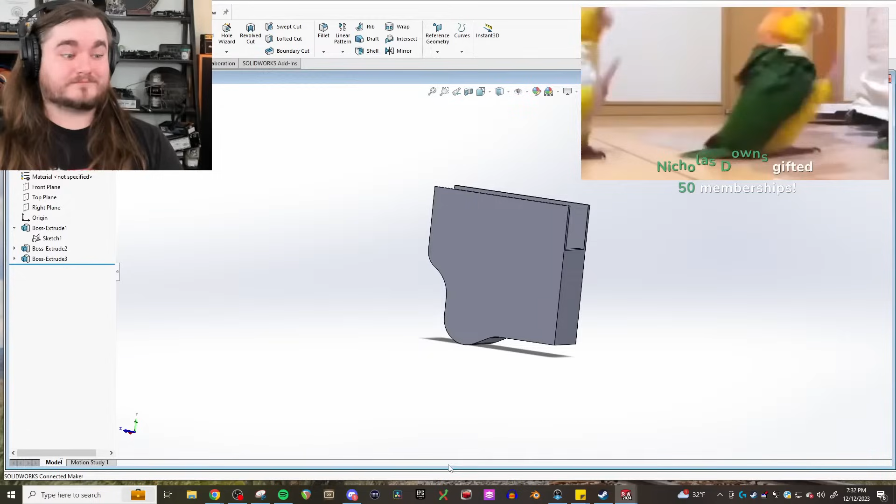My buddy and I immediately grabbed on out of instinct, and then everybody else hit the floor. So Groff's is their picnic grove - during the summers they actually stop there fairly regularly. Well, then this engineer sucked. But also, that was their whole claim - this is the only railroad that does a regularly scheduled meet, or one of the only railroads that does a regularly scheduled meet here as a passing siding.

It's been a minute since we've seen the birds. Thank you, Nicholas. I'm sitting here staring at the crosshead like, have I modeled this right? Have I modeled this right? And then... I guess I modeled it right.

Nobody expects the Birdie Inquisition. No one expects the Bird Inquisition. You could say the Birdie Inquisition is the peak of bird comedy. More birds. Oh no!

More birds. Okay, sorry Brett, you were saying? Thank you, Michael, 55 for the 50 gifted memberships. People are just now comedically interrupting with birds.

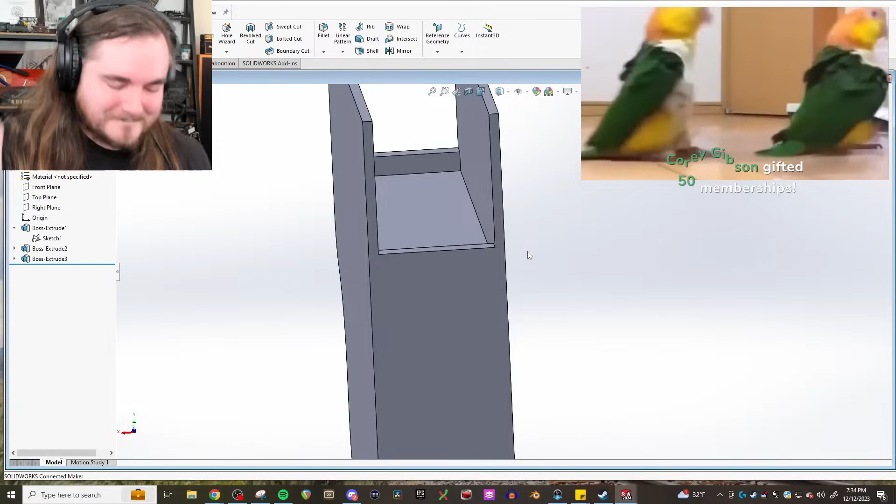Run! The birds are coming. Someone saw all the puns and decided to scream it for the birds, so they did it. Damn it, Corey, it's Corey! He's the one that was doing all the puns! We decided to do more birds for more puns!

Corey has single-handedly collected all of the bird and lime emojis at the same time. Corey is like, I want all the violence. Tonight is violence night for me, so I'm just going to do all the violence. I'm going to do 10 super chats and then 50 million memberships. I've got to read more super chats if I'm going to disappear because of all the birds.

Corey Gibson: I poured root beer in a square glass, now I just have beer. Congratulations, good stuff, Poker Face Productions. When does a joke become a dad joke? When it becomes apparent.

Where's the drum? Oh, we're going to use that once and then never do it again? I don't know who has the drum, but I have this. That works, that kind of works. Wait, hold on, I think I know. It might be somewhere - flaming asshole! Nope, that's not it, not that one. I think it's one of the default ones.

Railroader Davis, how did the farmer find his cow? He tracked her down. In stereo. King of comedy: if I owned a geared locomotive, I'd call it a Heisler. Nothing? You're just gonna leave me here with my stupid grin?

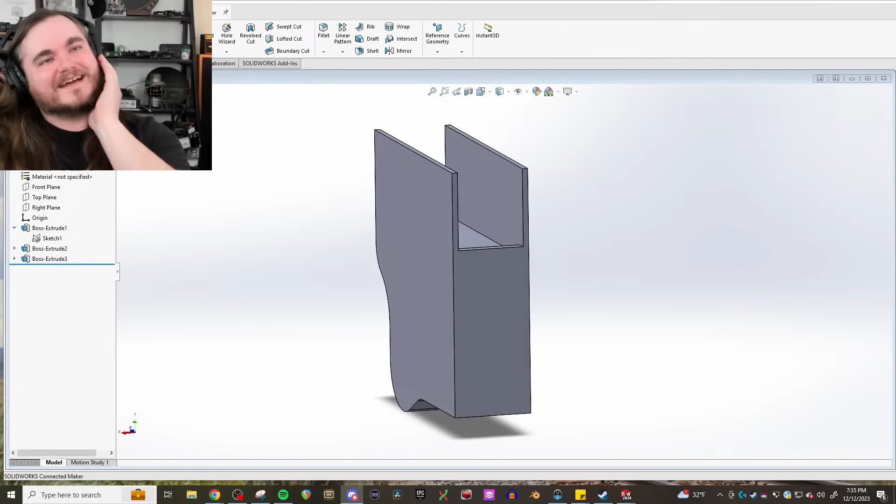Yeah, that's probably for the best. And Mar Flanagan, did you know you can cut the ocean in half with a seesaw? God damn it, what is this stream? I don't know what the stream's become. This has become the most cursed and wonderful stream. Am I dead? Is this purgatory?

Before the birds strike again - is it necessary for the lower shoe to be totally enclosed, or can it be open on the ends? It would save us some machining if it was open on the ends. It would.

My brain was saying that having it pocket down would give it some more structure, but I'd be happy to just have it be open. It'd be more contained rather than just using screws, but I think screwing it in would probably be fine. I don't know how much lateral force those things really see if they're oiled well - in theory they shouldn't be seeing much. Yeah, it'd be a lot simpler to make if it didn't have that.

Let me adjust that. Hello friends, good call out. Hey Jake, hello, it's Jake. Jake, run while you still can. Yeah, this stream is - either save us or run. I'm chained to the desk. Well, don't pay attention to the stream while you still can, then.

God damn it, what fresh hell are you unleashing upon SolidWorks now? Oh, I'm not unleashing hell upon SolidWorks, Corey Gibson and company are just sending the lime parade.

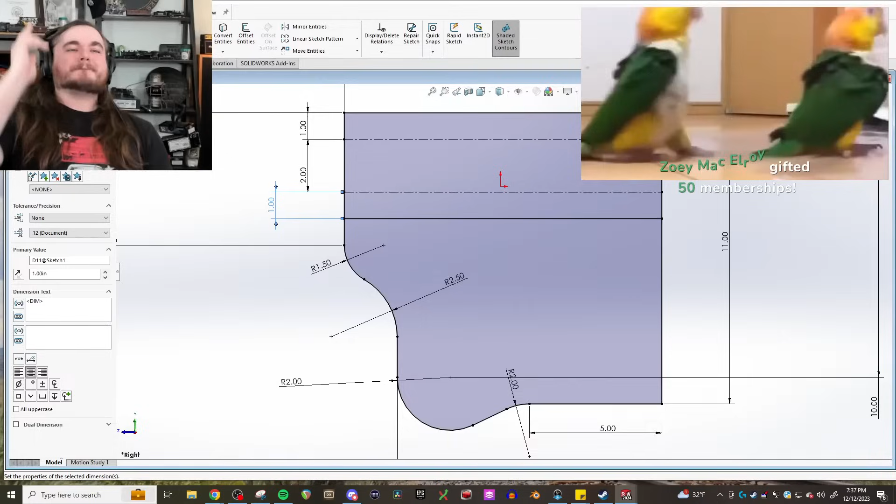We could get a series going over locomotive components like valve gear and internal workings in detail. As a 3D modeler, it would help immensely. Well, that's kind of half the reason why we're doing this.

On that subject, can I plug the C&O Historical Society? God, those videos are great. Not aware of these? The C&O Historical Society, they are fantastic. Brett did a video on Walschaerts valve gear that is the single most detailed video on Walschaerts valve gear you will ever get, to the point that I will never make one because I'll just go watch this guy's. It's like 46 minutes long.

If you wanted to know all the little details with Kanawha as the choo-choo, they actually made a pair of them. I'll send them both to you, Brett. But I think there was something Midland wanted to say as well. Yes, I also wanted to do a plug to our friends up in the great New England north, the WW&F. They have an animation of their new build number 11's valve gear that I'm putting in the text.

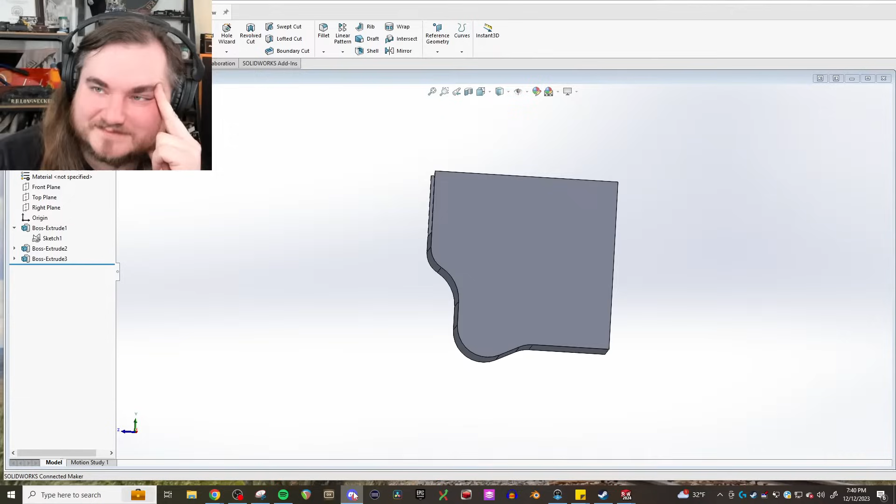I don't know that one. Oh, good lord, I want to say Shickshinny, but I know that's not right. No, you did very well. That second one is called Conshohocken. Okay, I can see that. The first one is Schuylkill, is it not? Yes it is, Schuylkill. I only know that because I have friends in Philadelphia. Brett, you've given me crap about the stuff in the Northwest.

That's worse. I mean, it's not great. New England is... not that Pennsylvania's New England, but like Rhode Island, some of the place names Ellis casually drops are like, what? No, hang on.

Mr. Shooter 4, $10, thank you very much. Singing in the shower is fun until you get soap in your mouth, then it's a soap opera.

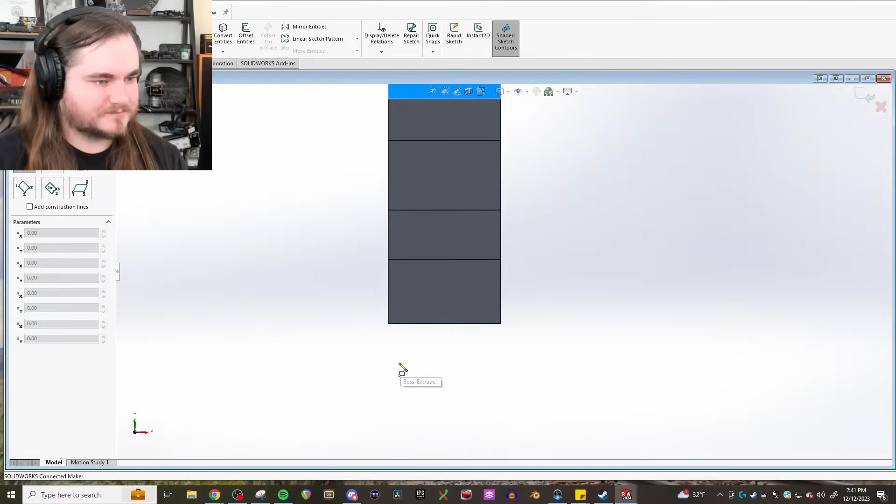You guys are stealing my job, I can't even sit here and come up with stuff faster than you guys are doing it. Corey Gibson, is it which is faster, hot or cold? You're stealing it from me.

Corey Gibson, which is faster, hot or cold? Hot, because you can still catch a cold.

Johnny Sims, welcome to the ES&D conductor ranks. Welcome. Oh, that video is from the glory days. Okay, that makes even more sense.

Andrew Frame, make them say Puyallup? Puyallup? I put it in VC text, Andrew. We're on the same page.

I know Snohomish because I've heard Mark say that one before. He's still in that county. Snohomish is a thing.

Yep, I used to live there. Puyallup. You Wallop. Wallop. You all. Sure, Wallop, of course, okay.

If we're doing this, I'm going to drop the obligatory Colorado one.

So you gotta play some of the stuff that Wings dropped in Saguache? VC text, no, you gotta play it for the stream.

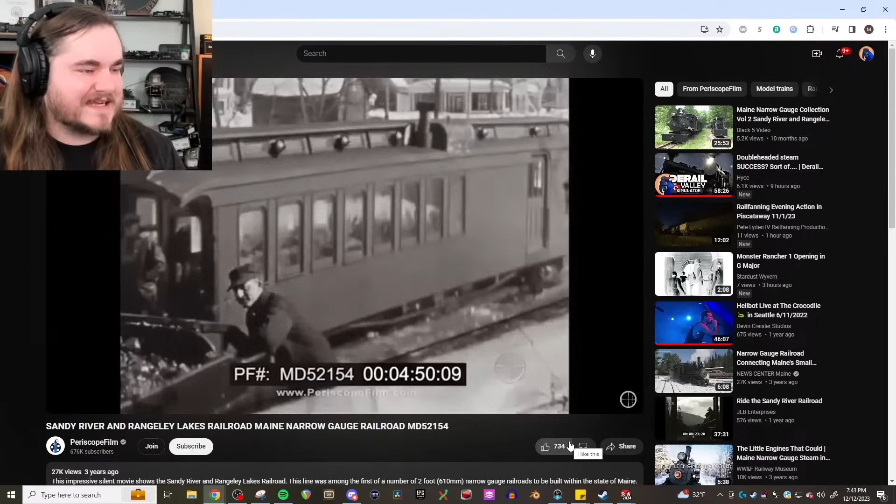This is literally the same, flying, switching, a loaded passenger. Yep, oh yes. What? Yep, this is Maine. This is Maine, welcome to fucking Maine. This is the SR&RL, welcome.

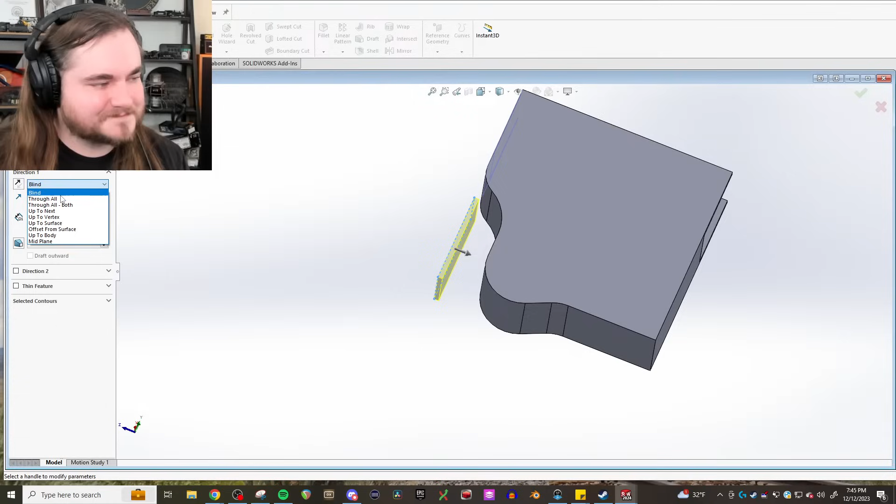The audience is dead, they've been killed. The audience no longer exists. You've killed even the penguins here. You've killed us all. Exactly, ah yes, that is what the brain is for doing.

Main rod pocket, does this look about right? Wait for the stream to catch up.

You should probably just stream to... how thick is it? It crashed Discord twice. How thick is the conrod?

Good question. Obviously, the thinner you go, the harder it's going to be to get a good casting.

These ribs are half-inch. I mean, at this rate, we're gonna have to put a plate on Montezuma, say this has been half built by puns, brought to you by Corey Gibson.

Jesus Christ! Not another one!

What did Tennessee? The same thing that Arkansas. There's another one in there about a banana split.

Sorry, Corey. Where do you learn to make a banana split? Sunday school.

Sorry Corey, I think your puns are slipping. That's it, if there's one more pun, COS is never coming out.

You heard it here first. We don't talk about COS, ladies and gentlemen. Yeah, we don't talk. It doesn't matter. This is heist, not COS.

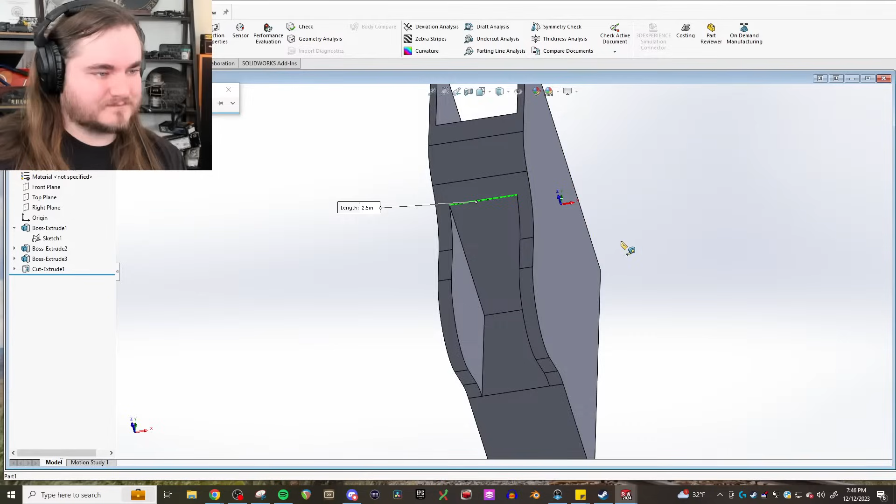John Uriel, here's a couple, try to pronounce that one, which I'll let somebody else try, and I know the other one is pronounced Mackinac. Yeah, Mackinac, I think I knew that one.

Charlevoix? Charlevoix is... I'd buy that, Charlevoix? Yeah, that would be more French I say, either Charlevoix or Charlevoix. Watch it be like Charlevoix or some shit.

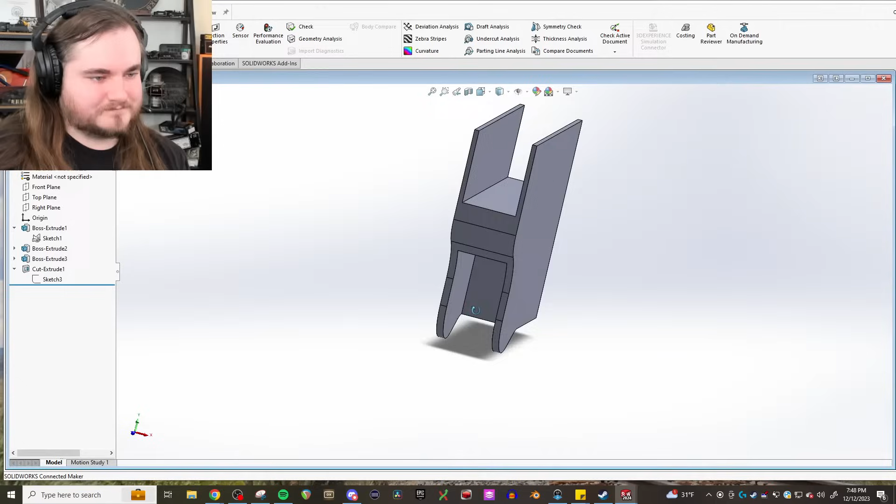Southern Pacific AC9, your fact was lost in a sea of shitty puns. Let me see if I can find it. Okay, Southern Pacific AC9, for $5, thank you friend. The Magma Arizona, I'm gonna let this drink happen. I will be right back. Is it just our presence that makes this happen? This is the first stream I've been on in like 2 months, and then this happens.

Southern Pacific AC9, I will repeat it to Mark when he gets back, but in case I forget: the Magma Arizona ran its last steam while Amtrak existed, late '71. Also, for a few months, they ran both standard gauge and 3-foot Magma scenic, which is pretty cool. When somebody has the money, well, you know.

What rock group has 4 men who don't sing? Mount Rushmore. No. I don't know. In a matchbox? No, but a tin can.

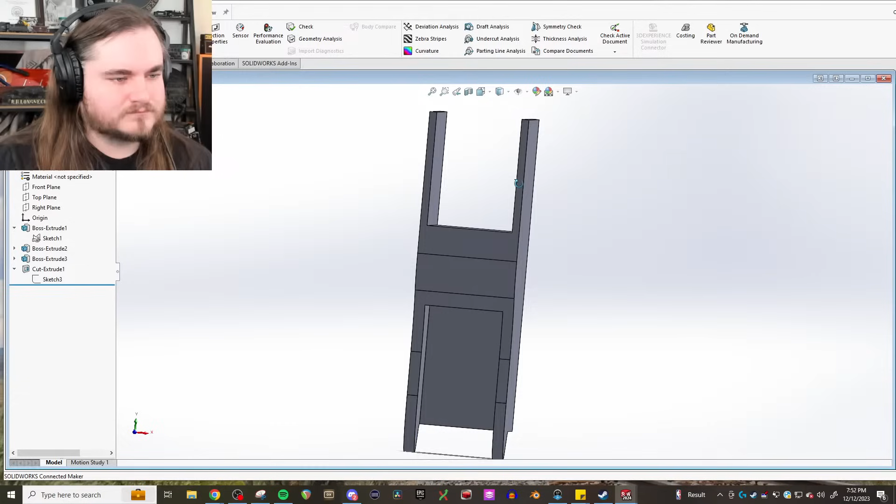Okay, I would buy the lateral tolerance on the main rod, 1/8 inch sounds good. 1/4 inch up top concerns me a little bit, that's a really thin casting. Okay, could we make the whole thing total a 1/2 inch thicker, 1/4 inch on each side? Even then, 1/2 inch might be pushing it. I mean, I thought we were just gonna have to end mill for that, but yeah.

Oh, we could do that. Yeah, we could do that. 1/4 inch would be like plate, quarter inch is real thin. 1/2 inch I would buy, especially if we're milling it. Yeah, alright, well, I wouldn't do 1/4 inch. Let me make it more thick.

Hello, what do you think Lily? You so rudely interrupted a minute ago, and now you're silent. Yeah, I would go 1/2 inch, maybe 3/8 at the minimum.

I think this vaguely goes back to the question I asked earlier about, instead of casting this, machining it out of billet. You could, you could. It'd be a complicated, big fucking billet, which would be very, very expensive. A lot of waste. Yeah, oh yeah, you would turn probably a $5,000 or $6,000 chunk of billet into mostly chips. Yeah.

At least at this point, over half of it is air. The chunk of billet wouldn't be $5,000 or $6,000 on its own - it's the time you put into machining it. Yeah, that's a lot of chippage.

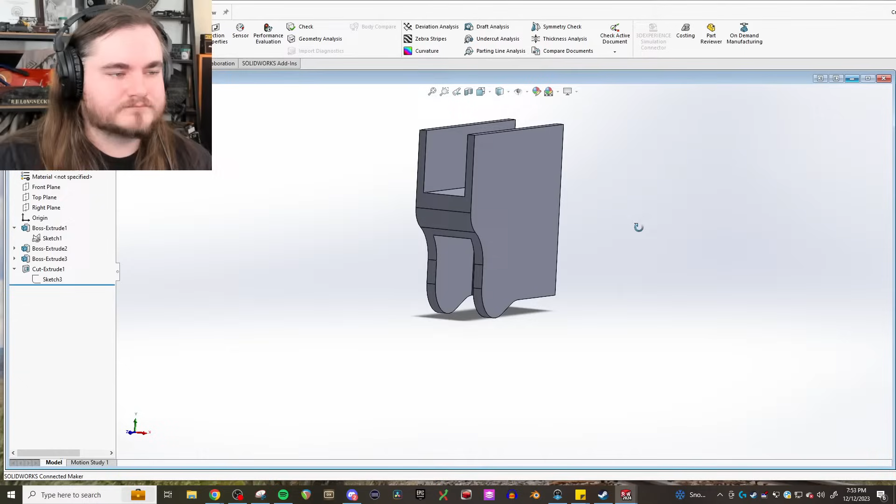Joe Pomeroy asks: you know why the British like warm beer? Because Lucas made refrigerators too. God damn it, pretty good one. But real, god damn it, but real.

Adam Cordell, member for 5 months, thank you for being on the Brakeman. Almost time to go do the thing elsewhere. Spoilers - ooh, really? Go do the thing. I met Adam at Chehalis, and Adam's now at Texas State, if I'm remembering right. Texas railroads, so it's exciting stuff you're doing, the learning. Do the thing.

Corey Gibson for maybe $5 - I'm gonna get revenge on the calendar, its days are numbered. Ugh, we need Jersey's extremely incorrect buzzer. We really do.

Perry asks: what's the rabbit's favorite type of car? The hopper, of course - seems to be said for any class 1 railroad car. Oh, I see. I was thinking like automobile.

It is the rabbit. James Buckner says 3/8 minimum. I'd err on the side of half-inch. Steam engine logic means stouter is betterer. I did 1/2 inch. So that makes the main have 5/8 at the bottom, which makes me feel a little more warm and fuzzy inside. I like that.

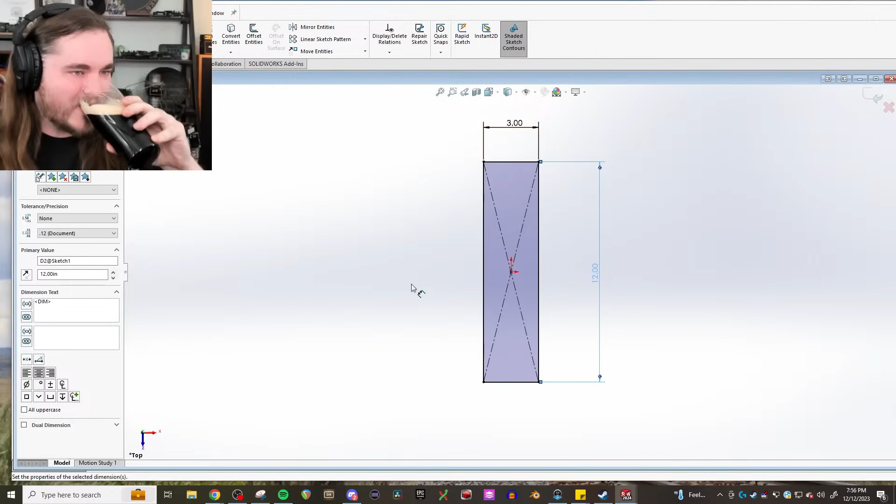Corey Gibson has funded this entire stream pretty much. So thank you, but damn you, Corey, but thank you. But damn you, but thank damn you.

Railroader Davis for $4.99 - sorry, I have one more: the Mennonites have a sixth sense, they can always tell when something's amish. No, hey, no.

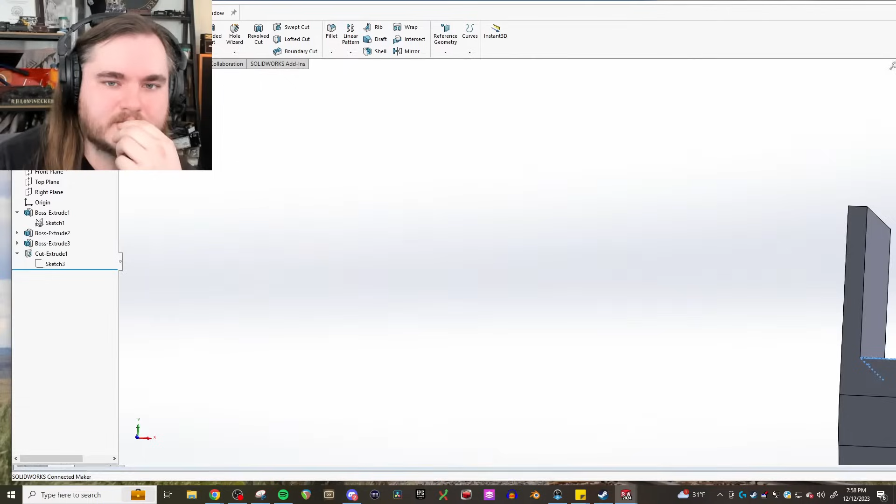If you want to do an improvement on the design, I would say do an alligator crosshead, top and bottom. Oh, an alligator is far too much of a change. That's much too much. Well, yeah, too much. Okay, no, yeah.

I understand the thought behind that, but the piston doesn't have enough power to really necessitate that. That's fair. If we're going to improve on the design that radically, we would just build a 2-8-0. And in fact, we wouldn't build a steam engine at all, we'd just build a diesel and call it a day.

If you really wanted to build an improved engine, you wouldn't build a steam one at all, you'd build electric with a catenary. String the wire! Why doesn't America electrify their trains? Put up the dang wires!

Hey, that'd give us some work, wouldn't it? That's gonna start an argument in my Discord. We do have an electrical division, you know. I mean, yeah, not within rail, but yes. I can smell the argument I just caused in my Discord, by the way.

From Mark, right here for brass, I've been using 255 222 122 because it's easy to remember. I just grabbed one of their default ones, it's the default brass texture.

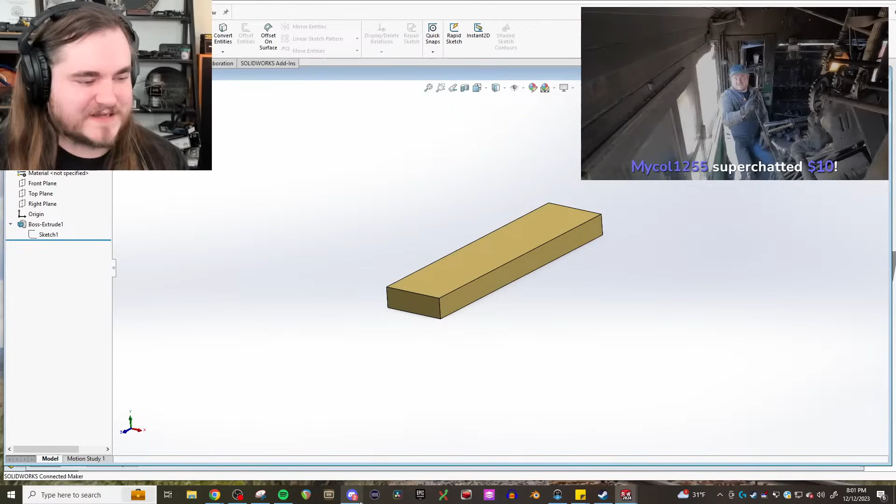For that reason, where's the lead pipe sound effect? Somewhere, oh no, we just... I would just say, is Caboose here? When did Caboose get here? Hi friend, don't worry about it. I popped in when the leper talk was happening, but you didn't make the leprechaun joke, so I decided to go have some taco salad.

Corey Gibson for $2, 'I'll take my job as jester seriously, it's appreciated, thank you.' Mycol1255 for $10: 'If the early bird gets the worm, what does the worm get?' The worm gets eaten.

I've come here with just one important question for everybody: where in heck did Corey Brill get all of these jokes? It's called Google, which I've said several times. No, who makes all these? I did a little digging behind the scenes. He's the new court jester, that explains everything.

He was tormenting myself, Midland, Jersey, everybody. We love Corey for this. Brill did some digging, you'll be pleased to know that I did a little digging and found out he just digs them up. He has a quarry. God, no, I have a quarry with you.

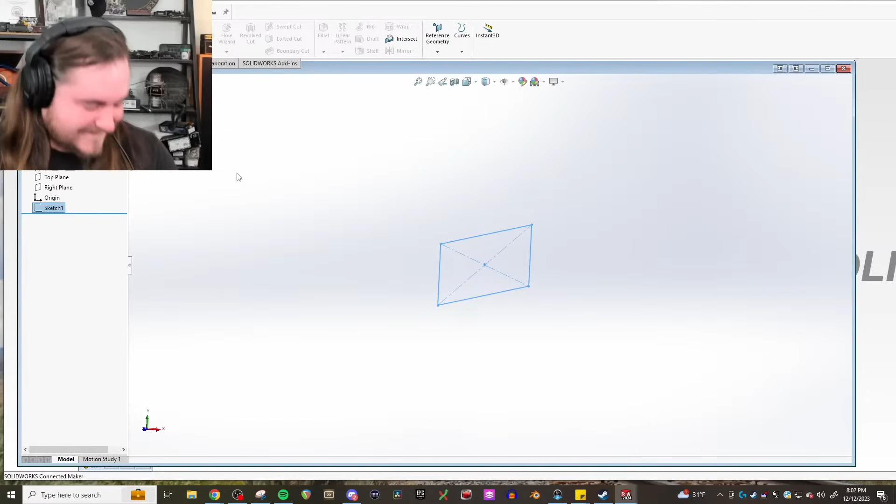You're welcome, thank you friend. 'If the stream keeps going this far off the rails, Zuma's never going to get on them.' It's fine. But if we never get on them, we never come off them. Well, that's not the E&D way, though.

Oh yeah, I guess it wouldn't be a T-shaped crosshead because it encircles the gib rather than being sandwiched between them, huh? You could have a U-shaped piece and a whatever, but I think we'll just make it out of 4 pieces, I guess.

Yeah, 4 pieces is easy, make rectangles on the mill. Go make rectangles, I like this rectangle, this is a good rectangle. How do all these squares make a circle?

Square, square, that's square, right, it goes in the square hole. It's in the COS Discord. Come on, Brett. That one, yeah. You know what's also in there?

Anyway, well done. Oh, that's why you're meowing at me angrily. I haven't fed you, go feed the kitty. And the cat has allowed you to live through that? Well, the cat was sleeping for a great portion of it, in fairness.

The cat's 16, isn't it? Oh wow, the cat is a little old lady that's very upset with me touching her. Let's go feed you, I'll be back. I think my cat's turning, well we don't really know, but best guess 12 this year.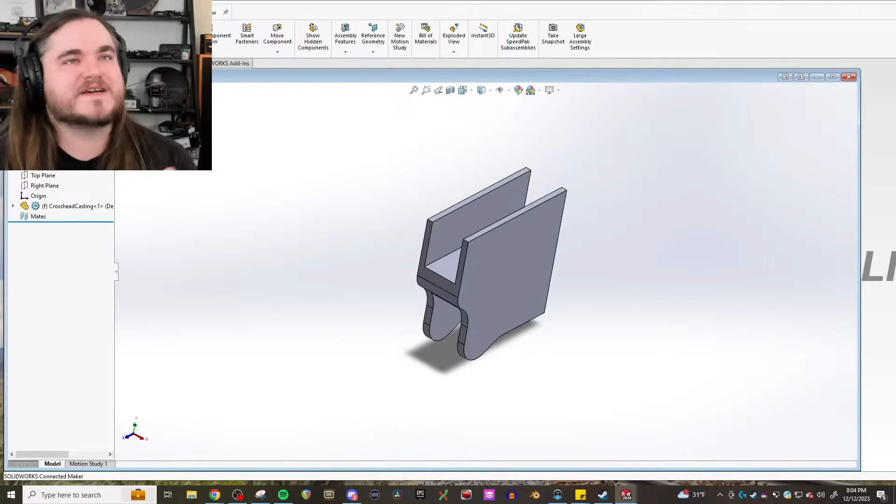Drew Barker, in all seriousness, an adorable yellow Carter Combine car as a B unit, or just a plain car, would look good behind Zuma. There's also a good prototype at the California Railroad Museum from your own M&SV. Cheers, Drew. We want to make it one of the little D&RG 2-axle dudes if we do a shitpost DB unit of any variety.

Which would be different than a Carter Brothers car. I don't think the brand ever had any Carter cars, not that I know of. I can't remember if the little 2-axle dudes were Billmeyer and Small or J&S.

They're built in Delaware, I don't know. Which is that, J&S? I don't know, somebody's gonna have my head on a spit for not knowing. I think Brill just said that would be J&S, so yeah, our 1895 J&S trolley car is definitely built in Delaware. I forget where Billmeyer and Small was.

You know, I might know of a 480 volt 3-phase generator with a Cummins 855 on it that might need a new home somewhere. Wait, are we fitting the B unit with head end power? Oh God, well I mean, just throw a VFD on it, and there you go, you got a traction motor. The head end power unit would have more power than the fucking steam engine.

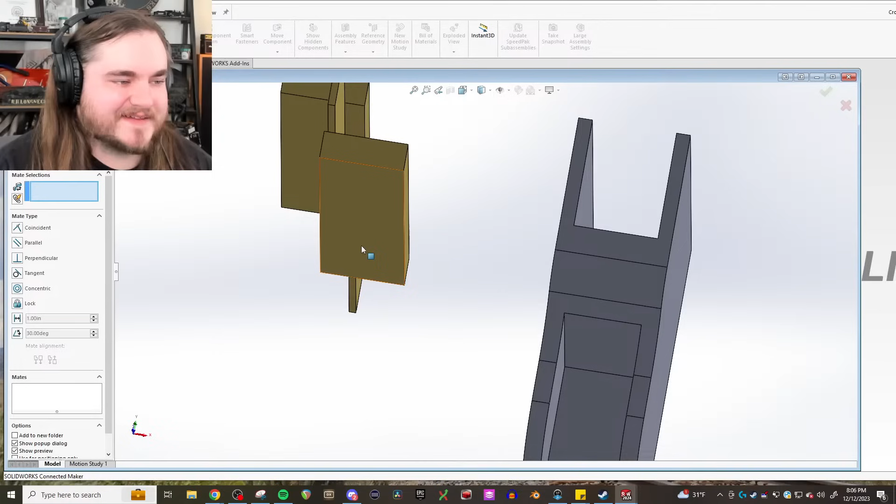Don't worry about it, so does the air pump. The air pump is highly likely to have a larger bore than the pistons. True. Alright, so steam locomotive, aka air locomotive. Send it. Yeah, we haven't decided yet, that's a point of contention that we'll have to sort out.

Well, we would have to come up with a proposal to the FRA to use a pump that is not in their listed things. No pump smaller than a 9.5-inch single stage is in current FRA code. I think Glenbrook ran with a 9.5 because of that. I think Eureka has maybe a smaller pump and has a waiver, or they proposed something, but it didn't make the CFR, I don't know. We would just have to come up with something, basically a reasonable standard that we could be held to if we wanted to use a smaller pump.

And we know people that could make us a smaller pump, which is the cool thing. But we'll have to chat through with the regulation people and come up with a proposal and kind of see what that looks like when we get there. And we're far from there.

So anyway, just be like the JNL and have a fucking Honda generator on the fender. No, we're not a theme park. No, kidding, we're not a theme park as classified by the state of Ohio. Cockatoo sounds, kidding, sorry Hovey, it's a cheap shot. Indeed. I mean, you could always just throw a root-style screw compressor off the 480 volt generator in the B unit.

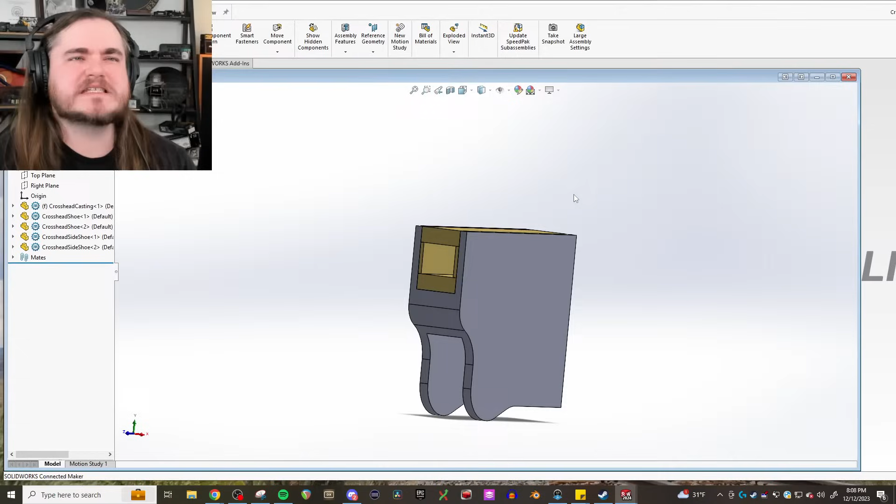Alright, so I've got a vague crosshead assembly here now. Obviously I don't have a hole for a wrist pin or a main rod because I think that's going to be kind of designed together, and I also don't have a hole for the piston rod, nor do I have bolt holes for whatever, but I could probably cut through these parts and put the 3 bolt holes in.

Three bolt holes would be good, and then maybe next week we can work on figuring out the relationship with the piston. Let me do that - that's another fun assembly that needs to be made. Actually, it would probably be part of this assembly - the piston crosshead assembly would probably be all one thing.

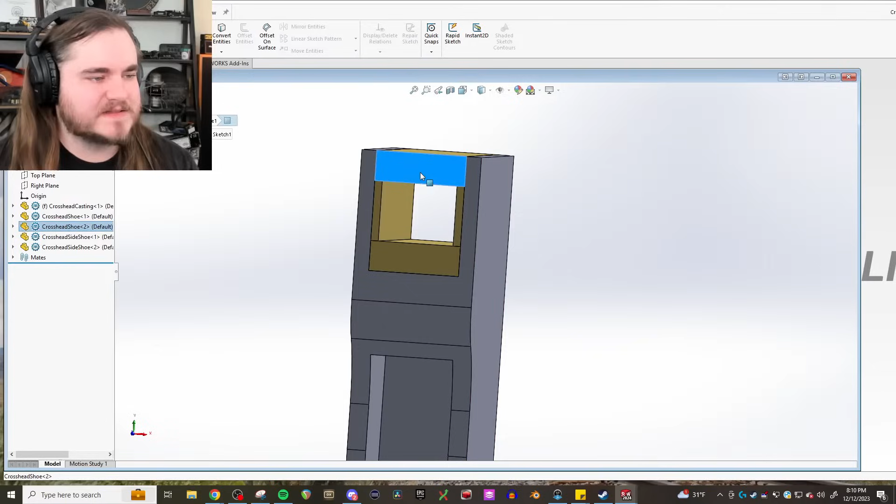But I made one top crosshead shoe that is - I made the same shoe so I could use the same shoe on both sides, and then I'm gonna put holes through the top one. I guess it doesn't matter for any - we just know to not do holes in the other one. For these purposes it doesn't really matter. I've got some of the brackets in the smoke box that are the same way - we'll just know not to put holes on this side because they're pointless.

Let's see what happens when I sketch in here. Anyway, give it a shot. I have a feeling I want to do 1/2 inch holes. Could get a little sketchy.

Damn it. Hey, he's back. Half is really good. Yeah, it's half on an inch thing, so you want to do 3/8 instead. That's probably fair - oh, I'd say 5/8. It's an inch tall shoe. Do you want to make the wall thickness smaller?

This one's a little different because it's not sandwiched. Yeah, these are the only three. If you're at 3/8 and I'm at 5/8, let's do half. I mean, I'm at half, which gives you a 1/4 inch on either side of it. Yeah, which should be enough. I'd be worried if we went 5/8 about tear out is all. Yeah, I mean that's legitimate.

And then I don't know - no, it's definitely not 2 inches in. It's definitely like an inch in based on the picture.

Noah Bloom says we could use Myron at Cedar Point for reference. You know, there was somebody, a friend of ours, that made a comment to that effect recently, and it was not appreciated in context.

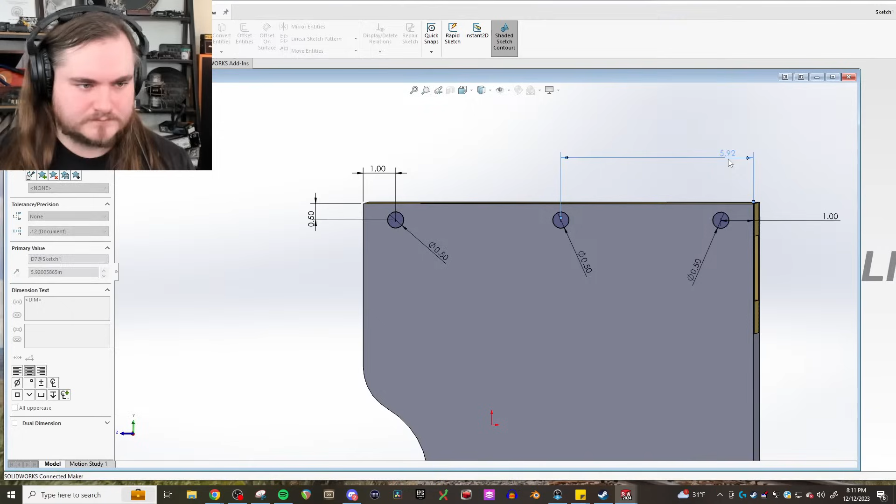But the trouble with that is it's not era appropriate. I don't actually know if Myron is even a Baldwin - I thought those engines were Porters. Because some folks, you see a 2-4-0 and you go, oh it's a 2-4-0, but it's not - oh it's actually a Vulcan, so no. Unfortunately, besides being a 2-4-0, it's really not a great reference.

6325 Returned to Steam, and the 4449 are both 4-8-4s. Take a look at them - this is true, tell me that they're the same engine. That's what you've equivocally said. 2-4-0s are rare, right? But the twin, air quotes, if we were to look at a reference engine...

It's the one in Brownsville. Yeah, there's a 2-4-2 that was built by Baldwin under Baird in the same year - I believe it's 1871. It was a 2-4-2 tank engine originally. Which, even though it is a 2-4-2 and was a tank engine, and a lot of the construction method - 42-inch gauge as well, which is kind of wacky - the construction methodology would be very similar, and ultimately that's what we're looking for as a reference, not how do you do a 2-4-0. It's, okay, how did Baldwin do this riveted, weird tombstone smoke box in 1871?

So we'll do it the way that Brett said to do it, because I'm learning how to really use SolidWorks as a real engineer. Look at me - engineer, look buddy, I'm an engineer. That means I solve practical problems, not problems like what is beauty - that'd fall within your purview, conundrums of philosophy. I solve practical problems.

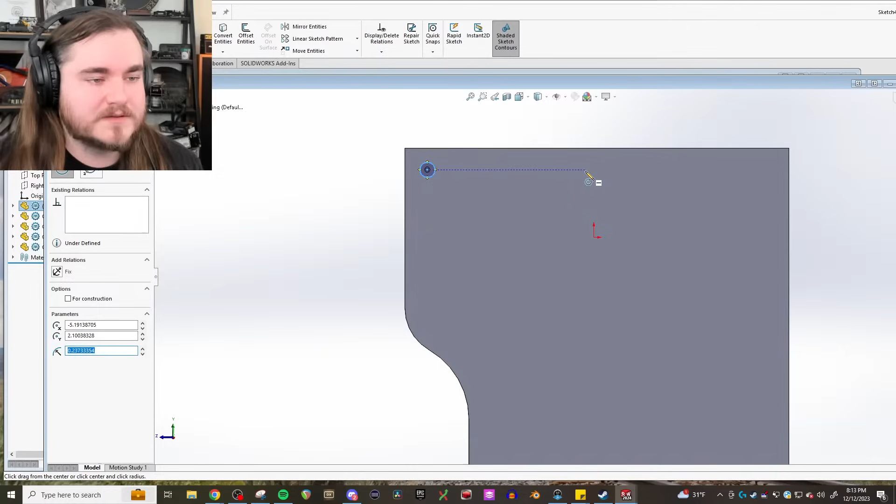This might be a really basic question, but I did not do the SolidWorks learning at mine, so I don't know what curriculum you got. Did you use center lines at all? Yeah. Okay.

I apologize for the stupid question then. Yeah, I've used them several times in the project. I haven't been paying attention, I was just looking at the stream. I'm just using relations right now instead, just putting them all horizontal. Same difference, many ways to skin the cat.

Indeed, you leave Amigo alone. I will, I use too many center lines. Amigo, squeaky, I love Amigo.

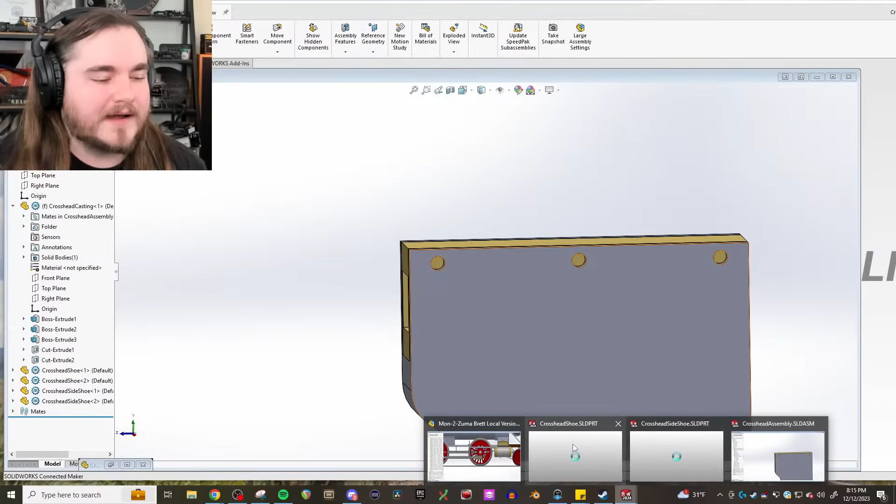I've said that my stupid little dream is that she would have been the first train south out of the current Denver Union Station, because the current one is late — I think the current one's actually after she was scrapped. But Union Station is a concept, and the locale and everything, she would have pulled into back in the day.

I think it'd be really fun to see if we could get Union Station to put in a third rail, which is probably impossible and probably a million people wouldn't care. But just for like 100 yards of track to march into the station with one coach behind you, at the platform at Union Station, that's a dream. If we have to settle for leaving it on a trailer out front of Union Station, okay.

I feel like we may have more luck with Colorado Springs or something, but anyway. The Grand was originally laid on 30-pound rail. We could just build some track panels and build track 9 for Union Station, or build track on the platform, which is another option I've considered. One of my neighbors does have two 3-foot gauge track panels just vibing in their side yard.

Sweet. My concern with laying a third rail at Union Station would be the high-level platforms — you'd have to step up out of the engine to get to them. No, the Amtrak track platforms are level. Yeah, tracks 3 and 4 are level. So we'd have to chat with the government.

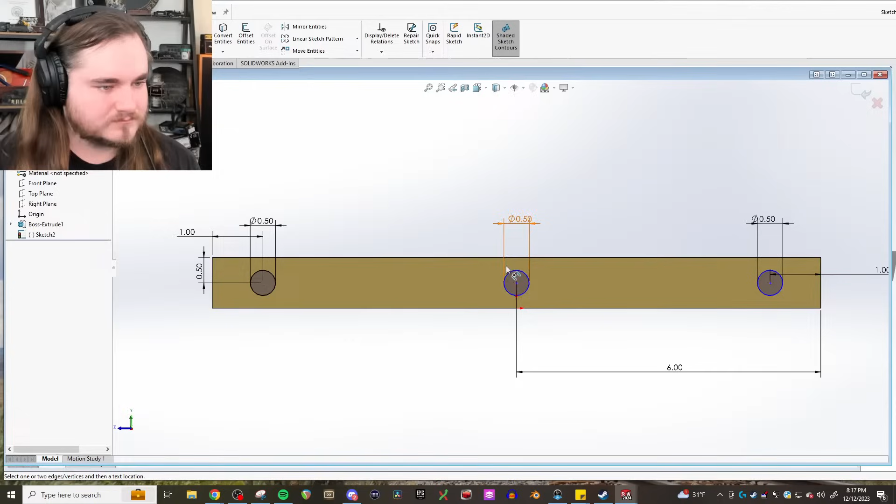I know this because they fought so hard to finally be allowed to bring the Big Boy into Union. Every year when they ran the Cheyenne Frontier Days train out of Denver, it never ran out of Union. Really? I didn't realize that. They would almost always run out of, I can never remember the name of the yard, but it's right by their intermodal facility. Oh yeah, that UP yard.

It's where the Rocky Mountaineer runs out of. It's not North Yard, but it's one of the joint— it was their yard, old coach yard. I always thought it was Union because I remember seeing in some footage like the ski train parked right next to it. The ski train did run out of Union, and they might have done it once or twice way back in the day, but in our lifetimes, no, it never ran out of Union. It was always out of that one yard.

Okay, the point being Union Station is very difficult to get access to. Hold on, Mainline says he has pictures of it running out of Union Station. The Big Boy? When were these pictures from? Presumably the Cheyenne Frontier Days train. Mainline, you're gonna have to post those somewhere so we can find out when. But I do seem to recall hearing that it used to run out of Union too. I mean, it used to, way back in the day.

Back when UP actually had a joint interest in it as a station, but nowadays that's not the case. I don't know where I'm remembering this footage from. Knowing me, it was probably like a Pentrex film or something.

But I do remember that. I don't remember if the more recent footage I saw was out of Union, but the more recent footage I vaguely recall is from the series Extreme Trains on the History Channel. It was only around for like a season, and it had one host who was a conductor somewhere, and he did the Cheyenne Frontier Days train.

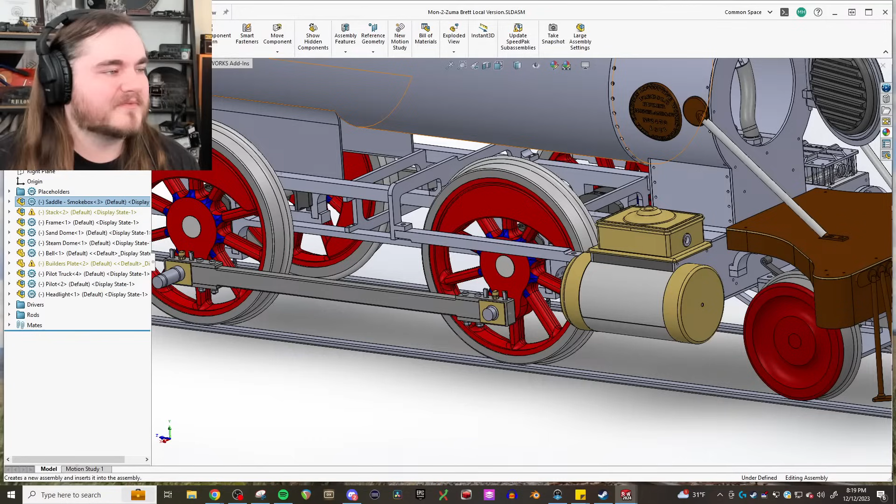Mark, you want to field that one? Because it was cast, and you need clearance for the main rod, which means making it just a square would lead to an excessive amount of machining. So the main rod's wrist pin connection is lowered and then given clearance on the back side. You really kind of need those positions there, and any extra weight on the front end wasn't really necessary. So that would be my two cents.

He wanted to see if you were going to react to the Last Week Tonight thing John Oliver did about freight trains. A lot of people have sent that to me. My sister was actually the first, and she said, I'm sure everyone has sent this to you, and I was like, actually, no one has. And now 15 or 16 people have sent me versions of it, which is great. I would rather hear about things than miss things. I haven't had 5 seconds to watch it because I will not look at how much time I've logged on Sanctuary Steam in the past couple weeks. I will just not do that.

Oh no, he's here. Oh no, oh god, we have him. And oh god, I tried to move the crosshead and I moved everything. You might have to fix something in place. The wheels spin, let me fix the smokebox front and face in place. Also hi Corey, please please regale us with your shit posts, but in person now.

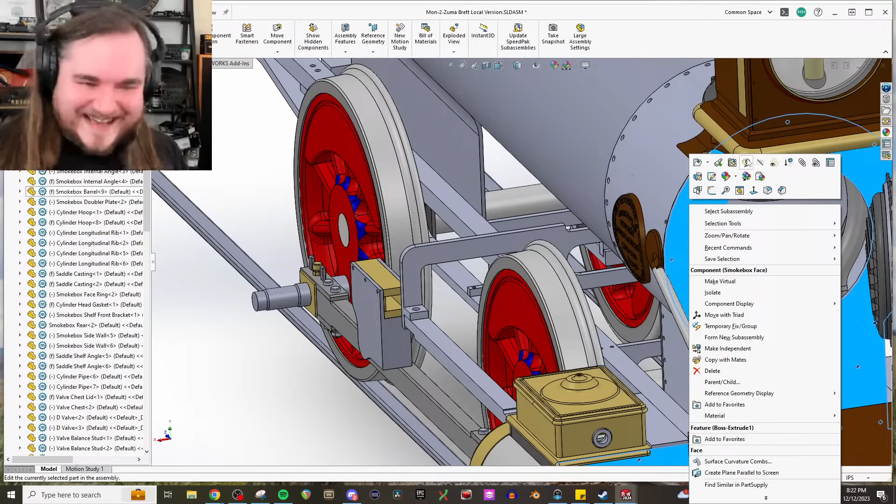Jordan Freeman for $1.99. I'm referring to the crosshead, yes, that would be why it was not a square. Also this is from a time when they actually cared about things being really pretty, so that's probably some reason why it has the fun hoopties in it rather than just being a square.

Brett, where does somebody fix something? If it's not in the right-click menu, which the assemblies can be a little weird about, you can try to lock-mate it to the origin. Interesting, all right, those were words. Lock. Can I just lock it? Please select entity, or so I guess we drop down there. Origin. That doesn't let me select that. So the track, maybe? Yeah, I guess we could select the track. Okay, that may have worked, so theoretically, yeah.

Hey, look. Woo, yeah, look at that. It does the thing, kind of. We've got a little thing, we've got a cute little crosshead guide bar and a cute little crosshead on it. And we're gonna need a main rod and a piston rod very shortly here.

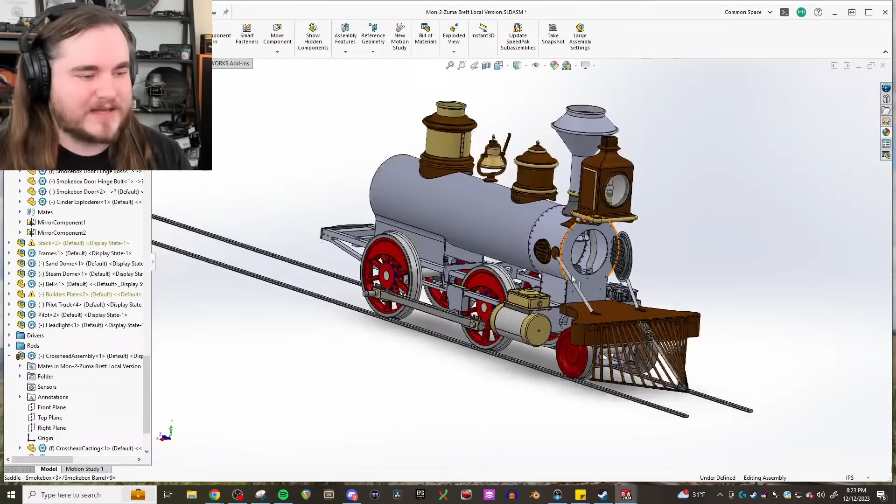To answer the question, whoever was earlier asking what had been done recently: lots, Brett has done a ton. The cab is off the model for temporary reasons, like the cab is kind of unimportant at the moment because it was always kind of phoned in anyway. But domes, bell, redone stack base, smokebox, and cylinder saddle that actually have all the geometry, the petticoat, the pilot truck that's actually entirely modeled based on a cousin engine, a very close cousin engine, maybe even a stepsister engine if you really want to get technical. Oh god, you actually did the sheet metal surrounds for the damn pilot too.

I didn't catch that. Yeah, you did that. Okay. Sheet metal surrounds for the pilot. The pilot is done.

Coupler and the pilot and drawbar. Wheels, side rods, square. There's axles in it now. So many little things have come into it. Got a crosshead done, and Brett's done a bunch. But we're going to end here because this was a long one.

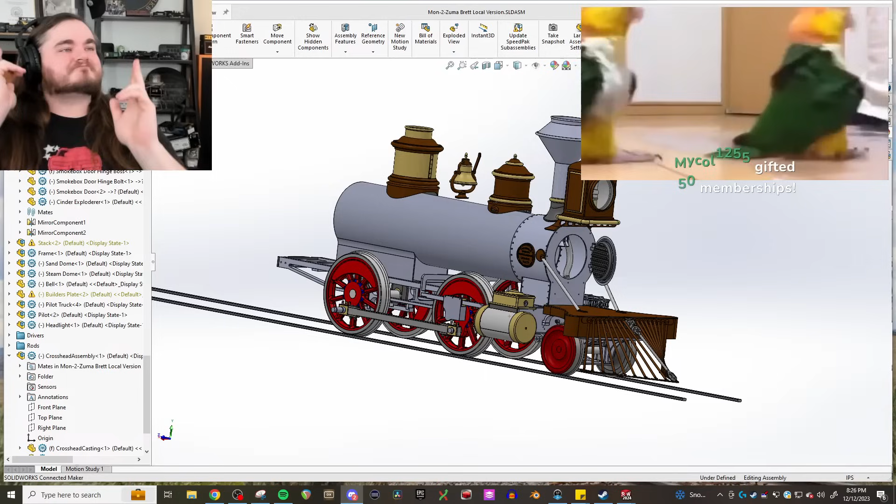Birds. Many birds just ran across. Yes. Thank you, MYcol, my friend.